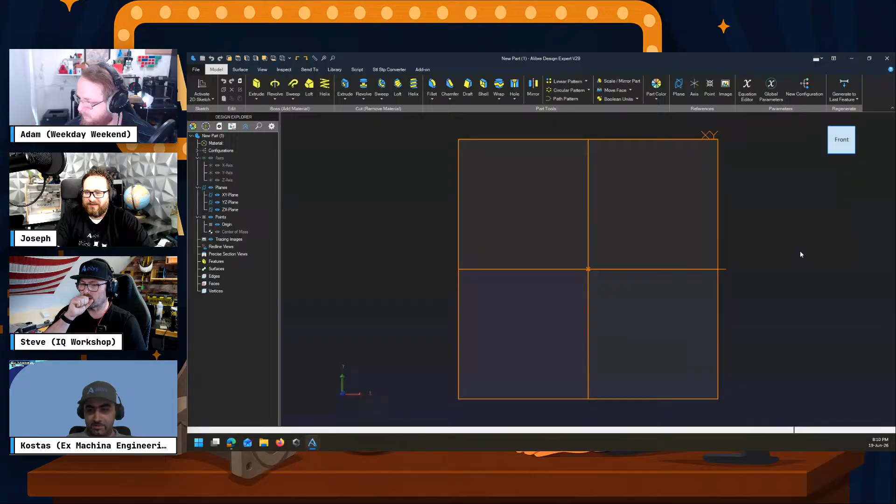So what I will be showing you guys now is the official Excel add-in. So let's say that we've got a flange here. This is the original example, and let's say the outer diameter is 285, and the inner diameter, let's call that 160. These are not real numbers, they're off the top of my head, but you can definitely look up real data and design off of that. So this is the flange disc.

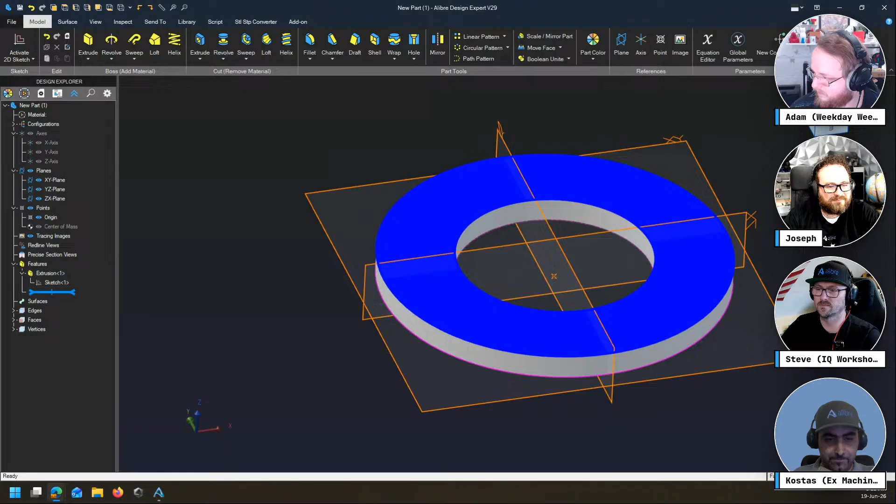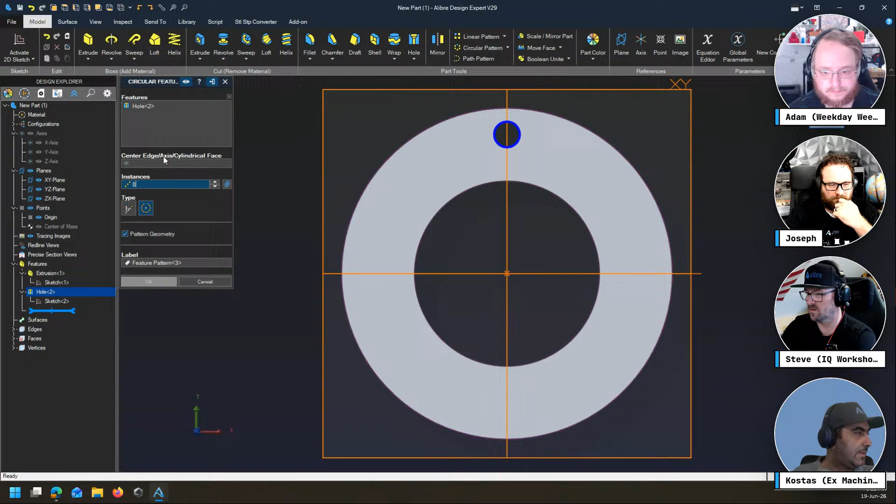Okay, let's get a hole going in there. Hole wizard. I think I have too many presets. I know how that goes. Yeah, the first time you open it, it takes a while if you've got a few presets. Okay, let's get a radius going here. Let's do 120. Is that going to work? Yeah, that's fine. And I'll pattern this 8 times. So this is a very basic rudimentary flange.

If we go into our equation editor, you will see that as we're designing, we're creating parameters. One parameter is a count parameter, number 8, that's the pattern I just did. Then you've got outer diameter, inner diameter, and you can change these names. This is the hole diameter, PCR, the circle radius. So this is the flange thickness, the hole diameter, and the radius of the bolt circle.

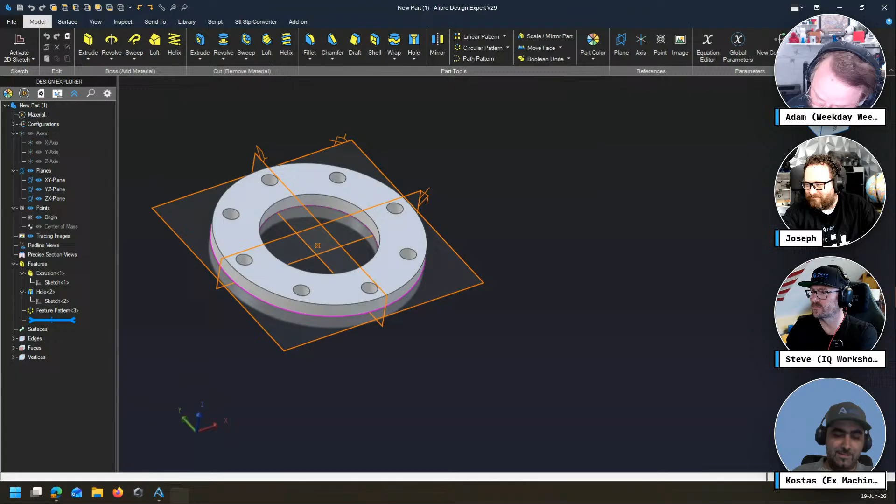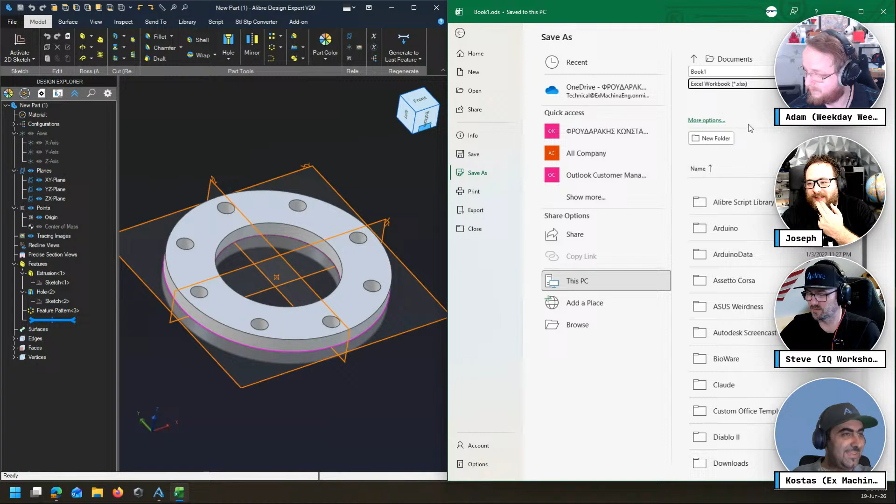I need to save this somewhere, I'll just do my desktop for now. So what happens now if we fire up Excel? Sorry, technical difficulties, we'll get there. If you go into add-ins, you need to save this workbook. Let's save it to documents. For some reason, my Office saves everything into open format first. I guess it knows who the owner is.

As soon as you open up the Alibre Excel add-in, and I show in my video how to install it, it's really easy, you get this screen. You have session here, configuration. It can also drive configurations, which is amazing. If you click here, you get this dialog box, which shows all of the open Alibre files. You might have part files or an assembly open. It'll all show up in here.

If you only have an assembly open, what you will see here is the assembly and also every other part file listed as open. Right now we only have this, so I select that, and you see that it brings the parameters in.

Let's now do a quick table. Sorry, I should have prepared this in advance. This is the OD. This is the ID. What else do I do? This is the disk thickness. This is... what else do I need? This is the hole diameter. But this is a good exercise to see that this is really easy and really quick to work with. So this is the hole diameter, and then we need the hole count.

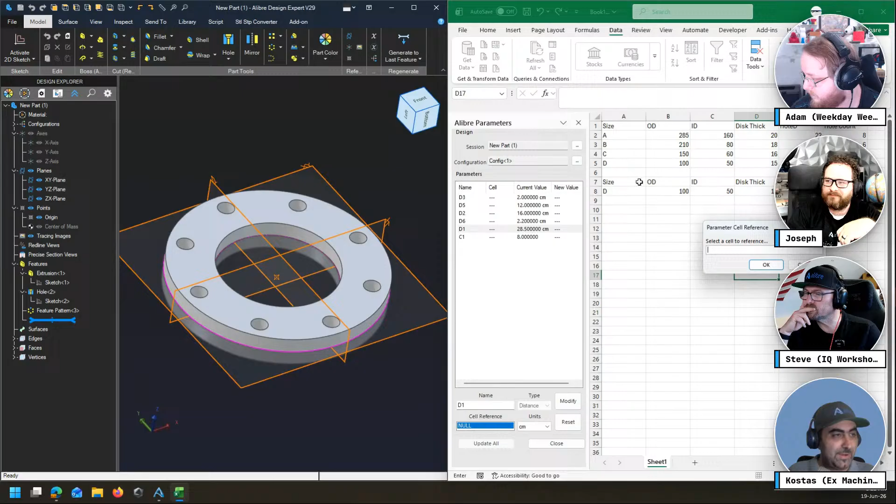So D1, okay. I click here on D1, and you see that I get some things down here. First of all, it says cell reference null. We don't want it. No, we want it to reference a cell. So as soon as I click on there, I get this dialog, and it says select the cell to reference. This is pretty straightforward, right? So I select this one, the OD, right? And I hit OK, and then I need to tell it what's the units.

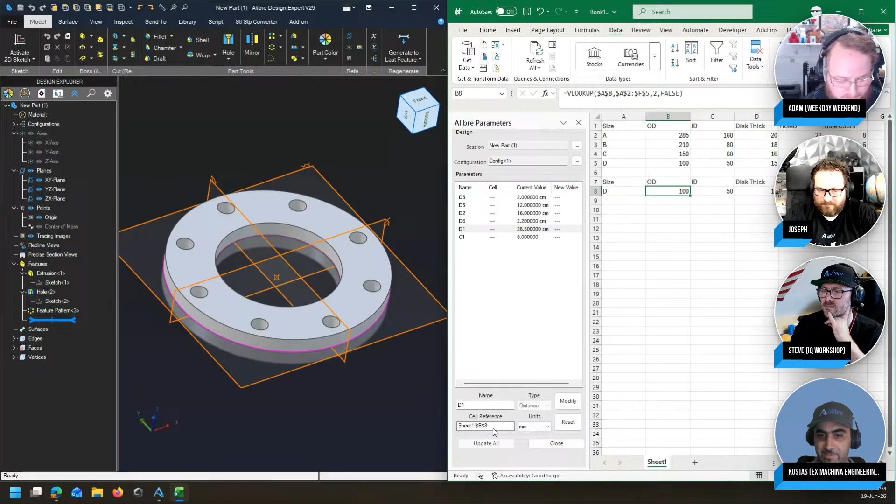It's in centimeters, not millimeters. It's not letting me highlight comments, but yeah. So you have your units down here, right? And you tell it that this cell reference that I just gave you is in millimeters. It just needs to know that, even though it operates in centimeters as it brings it in.

And after I select these two things, I just click modify. So what just happened? First of all, this became millimeters. That's easy to see. And now there's a cell reference, and the current value is 100 millimeters.

Just bringing it in to open things up. We have a column here that says new value, that is all blank at the moment. So let's go through real quick and do all of these. It's not going to take a huge amount of time, so this is the disk thickness, and again, it is in millimeters. As you modify things, you still have an overview right from this table, just to make sure that you're doing everything correctly. So see, now we missed.

Okay, so I'm just going to insert a column, doing it live here. Doing it live, right? Bolt circ, radius, right? But that's the beauty of it. It is this easy to work with, which is amazing, isn't it?

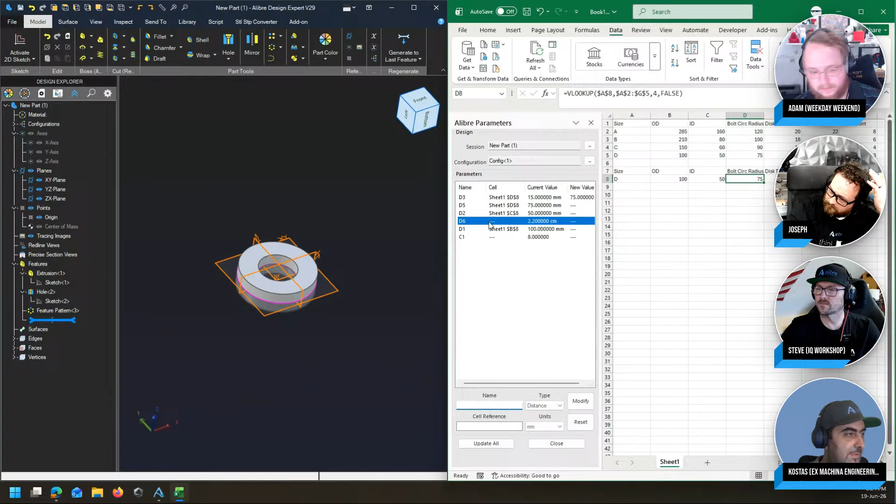Okay, oh, I didn't. Okay, so you see now, guys, I didn't hit modify there, so it didn't go in. Now it will go in. D6, okay, that is the whole diameter, which is this one. Do I have E8? Have I put that in?

Okay, I need to change this. So this is the disk thickness. Okay, millimeters modified, okay. So I scooched everything one column over, and then I almost put myself in a corner there.

And finally, we have the hole count, right? So this is how this works. By the way, the hole count is an integer, right? Doesn't have any units, and it recognizes this, right? Okay.

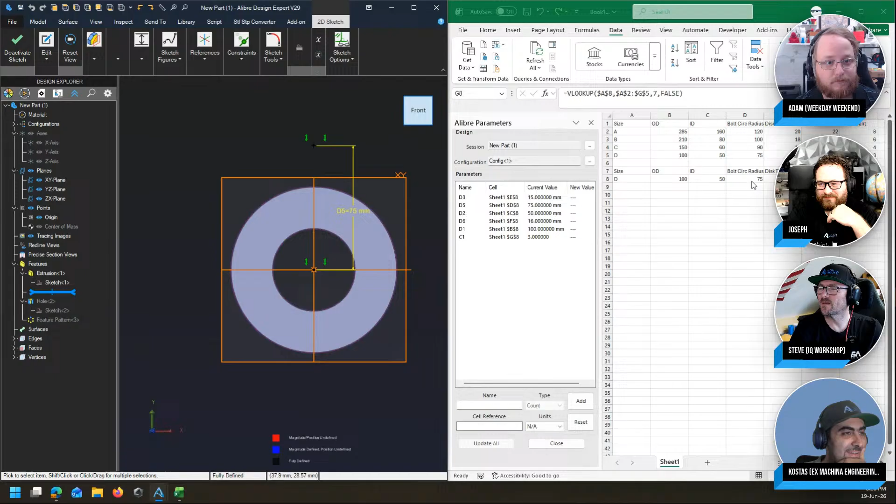So this has updated, which means that I messed up with my hole somewhere, right? Okay, so this 75 doesn't work. You see, guys, we need to rethink that. That's the radius, isn't it? So maybe 75 divided by 2.

So yeah, I guess this works a bit better. And you see that now that I changed this, right? I changed it in the table. The VLOOKUP picked it up, changed it in the driven cells, and the add-in picked it up, and it's telling me you have a new value there. So I just say update all, and it's in here.

I'm inside a sketch, right? It's not, it works like seamlessly. And if I deactivate my sketch and hit F5, it should go through. And let's check, what is this, this diameter is 16 millimeters, right?

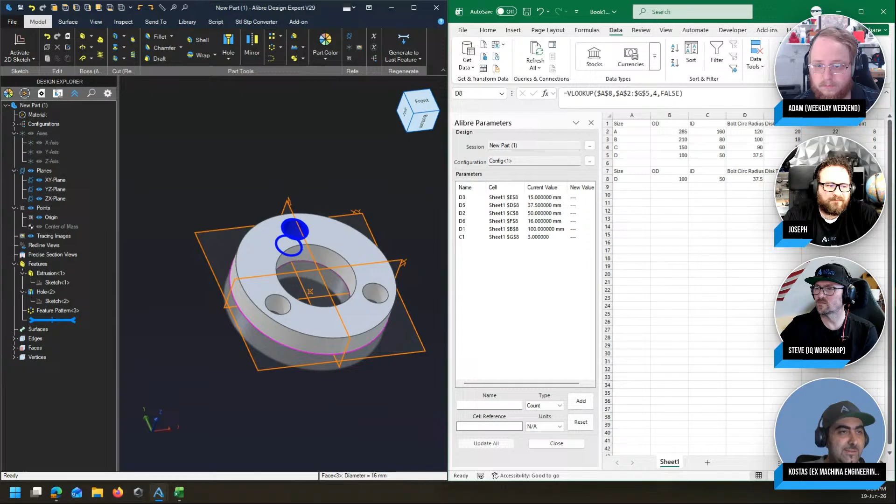So let's change this, I don't like it. Change it in the table. The VLOOKUP picks it up. I hit update all, and now it's 12 millimeters. So let's go and build our original one again. Update all.

Well, this will take a while. This is what we started with. Let's see, size B. Okay, I think these all need to be divided by 2 or something. Let's do this 80, let's do this 55. Okay, so size B.

You see, I'm changing these as I go, right? Hit update all. This is our size B now. So hole diameter, if I click here, I get, you see down here, 18, size B, hole diameter 18, right?

So what do I have now? I have a part here that will change according to my data. And the beauty is not when you make the data by yourself like I did here, right? The beauty is when you go online and you download a huge table and you clean it up with a Power Query or something. And then what you have is all of the parts in that single table as a single part.

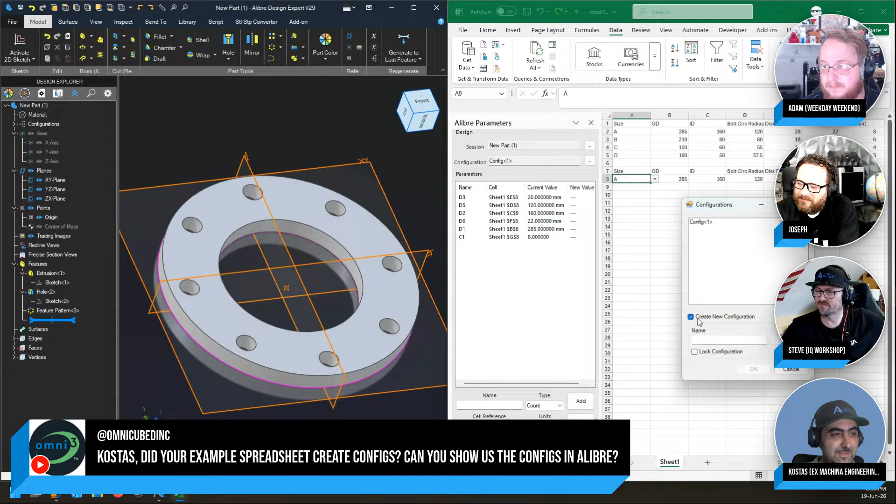We got a pretty good question here. Did your example spreadsheet create configs? It didn't, and why is that? Because I didn't ask it to. You see that I can create a new configuration right off the bat here, guys, there you go. There's proof it does not create new configurations automatically. That's the beauty of it, and the beauty of this spreadsheet.

But I might be hogging the time, and this might be a nice subject for a video, a deep dive.

The beauty is that when you create a new configuration from the Alibre Excel add-in, Configuration 2 can drive the same parameters from different cells. So right now, D1 is driven by the cell in sheet 1 at position B8. I just clicked on it and it shows me what's what.

If I do a configuration, I can have the same parameter driven by a different cell down here. So the combinations are amazing. Seriously, your imagination is the actual limit at this point, to what you can do.

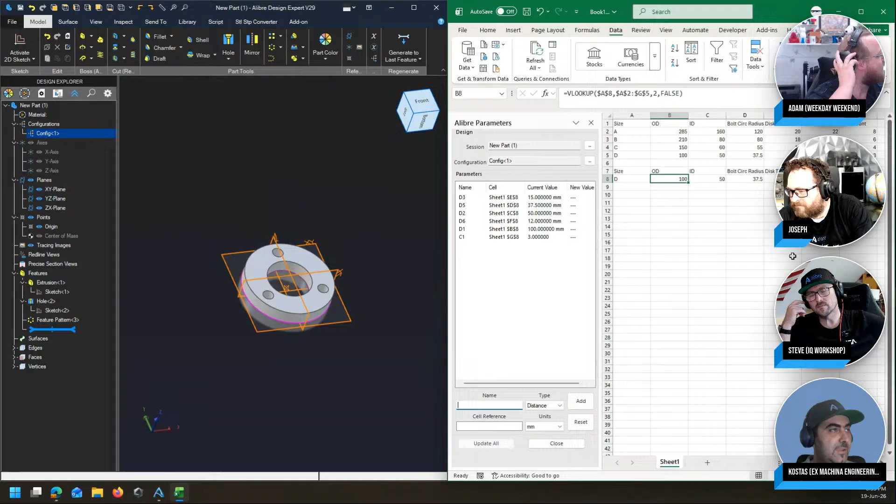To put it in database terms, if that helps anyone, this is not a one-to-one relationship. This is a hybrid relationship, because it can be a one-to-many and it can also be many-to-one. This part can be driven by many Excel spreadsheets if you want, and also many parts can be driven by this one Excel spreadsheet.

In my video, I take a single Excel spreadsheet and drive a shaft, a pulley, and a key - basically the entire assembly from a single Excel file. And just to blow your minds even more, this works in Atom 3D, but it can also drive global parameter files, not just 3D models of parts and assemblies. You can actually drive the global parameters, which has its own layer of configurations. The level of complexity management you can do with this little tool, given to us by Alibre for free, included even in Atom 3D.

There's a lot of questions here. This is kind of just a really broad view of it. Kostas has a couple different videos that explain this whole thing way more in depth, as well as there's always the forum if there's something specific that you're wanting to do.

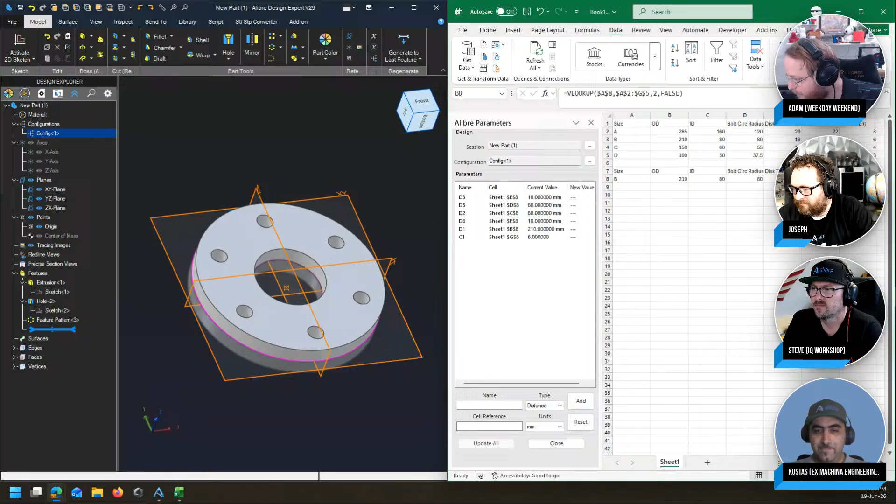This is a good one here: imagine the part needs a complex drawing that I don't want to make 10 times over. Exactly. How does a save-as workflow work that includes the drawing and allows multiple parts referencing the same table?

That's a great question. Oh yeah, sorry. Let me tell you, it's as simple as this, right? So...

Let's say that in one assembly I need size A. So this is my generator part, right? Let's consider this to be a generator part, and then I go and hit save as. I'll call this size A, and now I have size A as a separate part file. I can go in and bring it into my assembly.

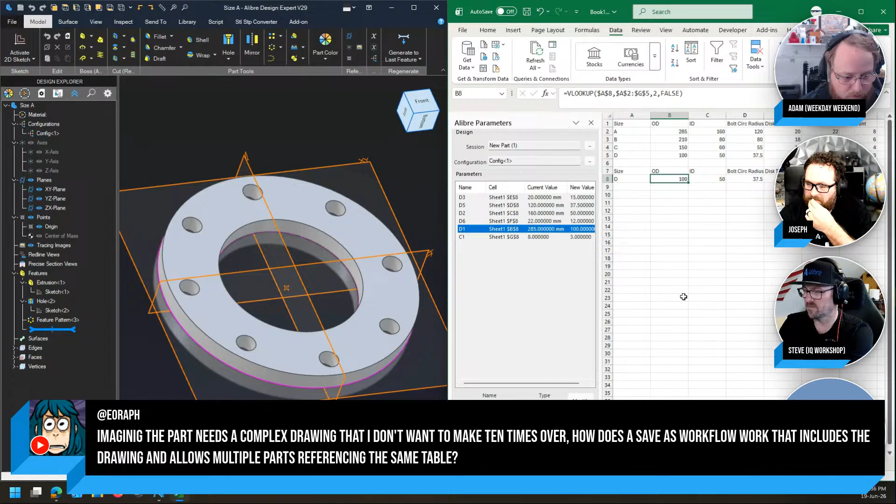Now, three days later, I make a different pipeline that requires size D. I open up my generator part, make my size D, and then go and save as this file. You can see this is size A already created, and I will just save this as size D. So basically, what I've done here...

And the way I propose to you guys that you use this is you can make a library of generator parts, right?

So there is a caveat to that, though. Let me just show you what it is, right?

Let's close this. Let's go to size A.

And while we're waiting, I see a pretty compelling question: is this a way to create points for a spline curve?

And of course, yep, there are a few things behind that too, so don't let me forget to talk about that as well.

So if I go into my equation editor, right, you will just get this message saying missing external reference: one or more externally driven parameters have a missing source spreadsheet file.

Are you sharing that, Kostas? Because we've got the Alibre launcher. Oh, I didn't, I'm sorry, let me do that again. That's okay, it opened up in my second screen.

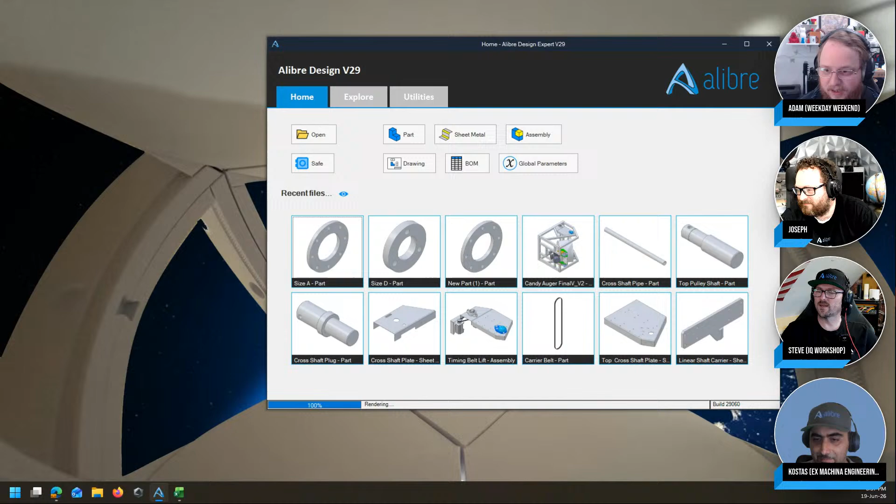And I also see this question: can this be extended to the sheet metal?

Guys, if it opens up in Alibre, it can be driven by an Excel spreadsheet. So sheet metal, whatever, sky's the limit, basically, right?

Okay, so let me bring that in. So I click on my equation editor here, and I get this error message: one or more externally driven parameters have a missing source spreadsheet file. So basically what it's telling me, and you see the source here, right? It says X. Okay.

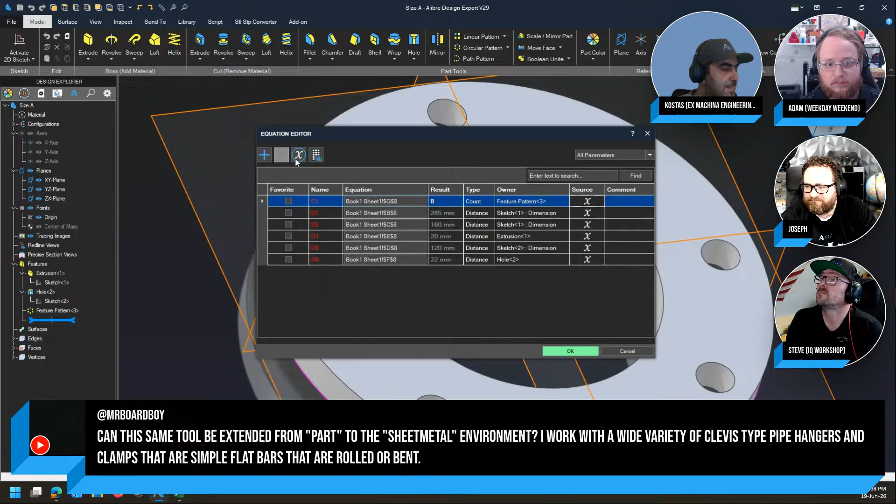So if I change this, can I change this? So yeah, I cannot change that.

So the idea here is that this part now exists as is. You can add things to it, right? For example...

What can I do? Let's... okay, having... oh man, this is really slow. Having a keyway cutaway that doesn't make real sense for a pipe flange, but you know, let's just pretend that it does.

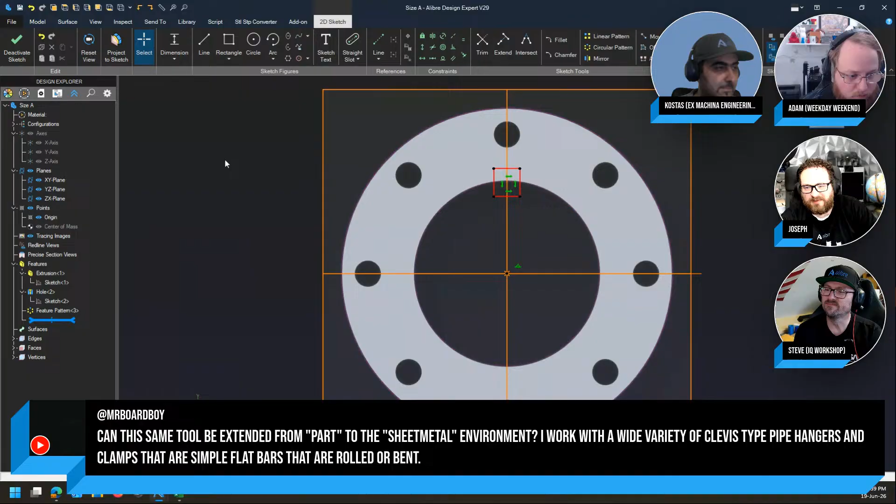And I just used my new macro here for cut through all, right? Just to plug in my latest video as well.

So now you can add things to it, right? I'm getting that message again. You can add things to it, but you see that the other values are basically kind of locked.

So you will consider these files, you know, like starting files, right? You get your file, it works, it calculates, it's usable in an assembly, but in order to break the connection between the spreadsheet and this file, you basically need to make new parameters and go in one by one in every place that they are used and reassign them.

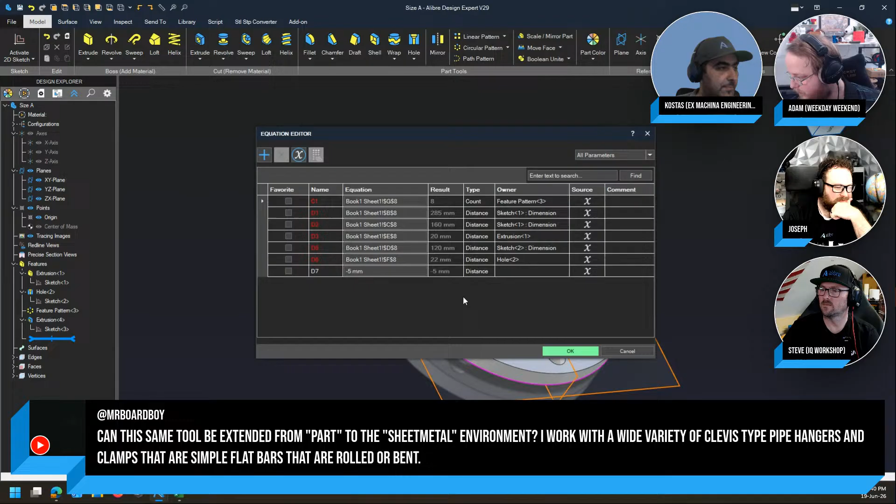So yeah, the way you treat these parts is as generated dumb parts, because they're now locked like this, but you can then add things to it, right? So yeah, that's the general outlook of it.

Any other questions? We still have the highlighted tool comment here that yeah, it can definitely be extended to the sheet metal. Yep. And you might want to check your noise filtering, but I think we have some background here.

I also see a question: do you always have to use the generator part workflow and save new files, or can the spreadsheet create configurations in the same file? Thanks for that, Joseph.

Yep, so for a second it looked like you could tell it to generate configurations. So I'll let you take that one, Kostas. Can you generate configurations from the Excel add-in is the question.

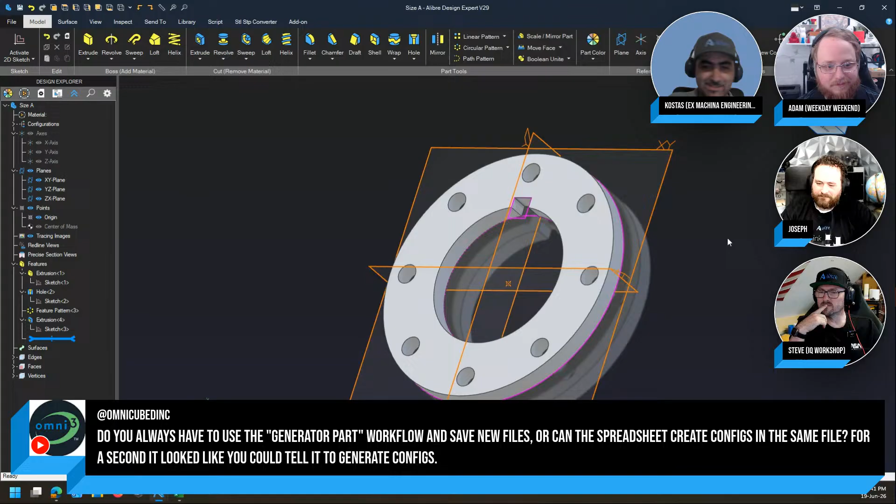You can. And I'll be completely honest, I've never done it, but if you would like to see me fail live, we're gonna pull the lever. Oh yeah. I mean, I always say that when you're making a YouTube video to educate people, you need to be brave enough to fail on screen. I don't always do that. I'm not always that brave, but yeah, let's fail on screen right now.

So this is our generator part. Just to answer the first part of this question, no, you do not always need to use the generator part workflow, because you might design a part that you want to go in an assembly, and it needs to exist only in that one assembly, right? You don't need to make copies of it. It just needs to exist in that one assembly. Or you can drive the entire assembly off of it, right? So in that case, you don't use the generator part. Your part is your actual part.

But in a case like this, when you're making a flange, which, let's be honest, in a single pipeline you might use dozens of these, or even hundreds, right? Well, in parts like this, it pays to use the generator part workflow. But if you're just making an assembly and you want this part, and the timing pulley, so my other video is a great example. A shaft, a key on that shaft with its key slot and whatnot, and the pulley are all driven by the same Excel file. So in that case, it's not a generator part workflow.

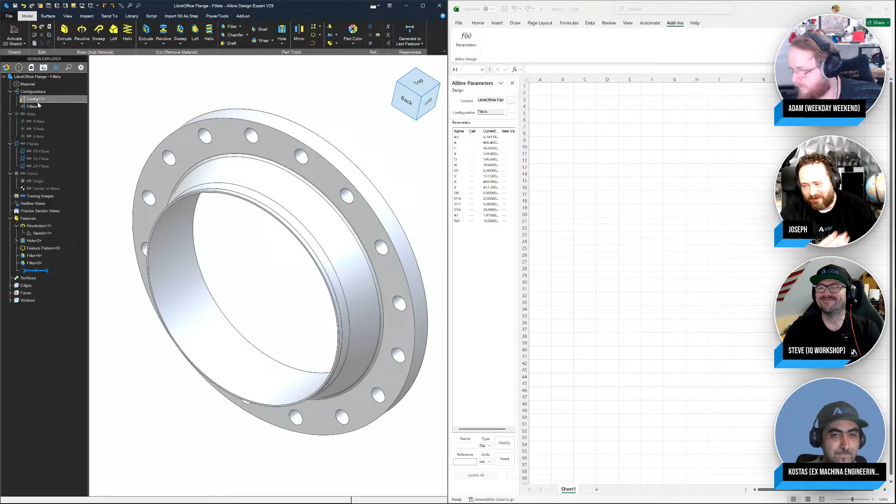Go ahead, Joseph. Sorry, if you don't mind me cutting in here, I can switch here. So obviously I have this flange with two fillets. I'm trying to be cool like Kostas, because he put out this awesome video about weld neck flanges, and you can choose configurations, but if you click these three dots, you can just click a box here that says create new configuration, and I can say new config. We can lock it if we want to. Click create, and then I got this new config there.

So useful, handy. And as Kostas was saying, I think Kostas is the real master at Excel here, because everything is so well thought out. So, but yeah, kind of a cool nugget there. Yeah. So that's what I was about to do here. Oh, sorry, did I steal it? Sorry about that. No. Don't worry about it.

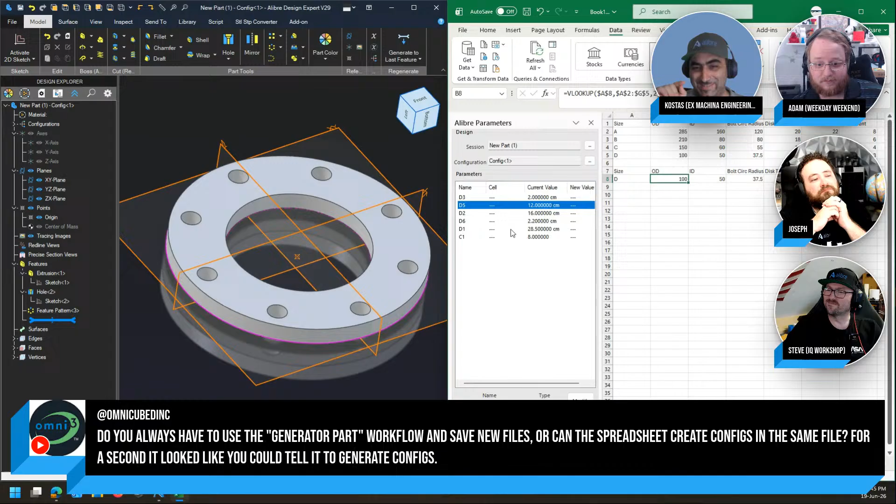So let's call this config "about to fail," because why not? And let's hit create, and I'll hit OK. So where are we now? Okay. I didn't save this file. Okay, so this is okay. And I've done this mistake with the Excel add-in before. It's not the first time I do it. After you link your Excel file, you need to save both the Excel file and your part file, or else you didn't link anything. Okay? So that was a nice one. So this is all unlinked again.

Yeah. If you want to bear with me while I do that again, or maybe... So I got a point to make here. I think go, Steve. Go. Is it fair to say that not all use cases are equal? So you've got somebody who is creating, if you want, seed parts: flanges, pulleys, gears. But then you've got somebody in a different use case that would be creating assemblies and driving parts. So what you're demonstrating here is a framework that has the flexibility to do all of these different things, not just one. So it's about the viewers here with us today looking at their own use cases and seeing how they can apply this framework to it.

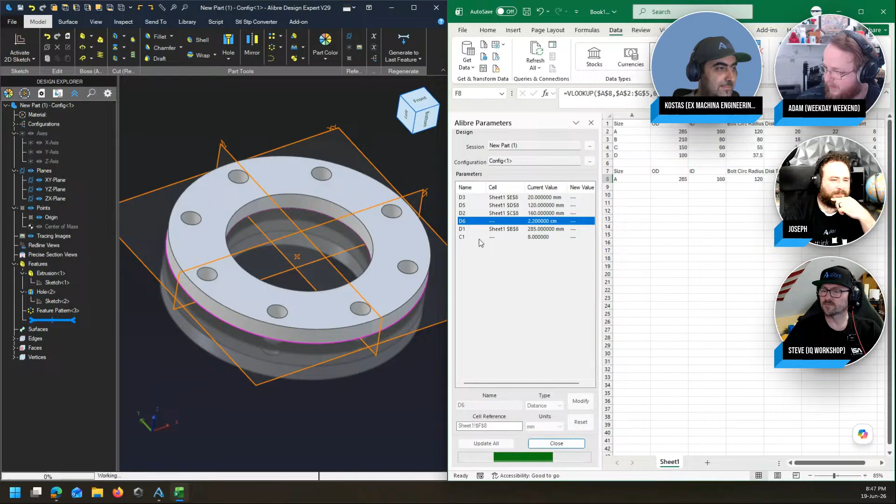Definitely, that's a great point. Keep in mind that although Kostas is using Excel, Joseph is going to show us a little bit about using LibreOffice here in a second, which is completely and totally free. On top of that, awesome. The fact that you can do it, right?

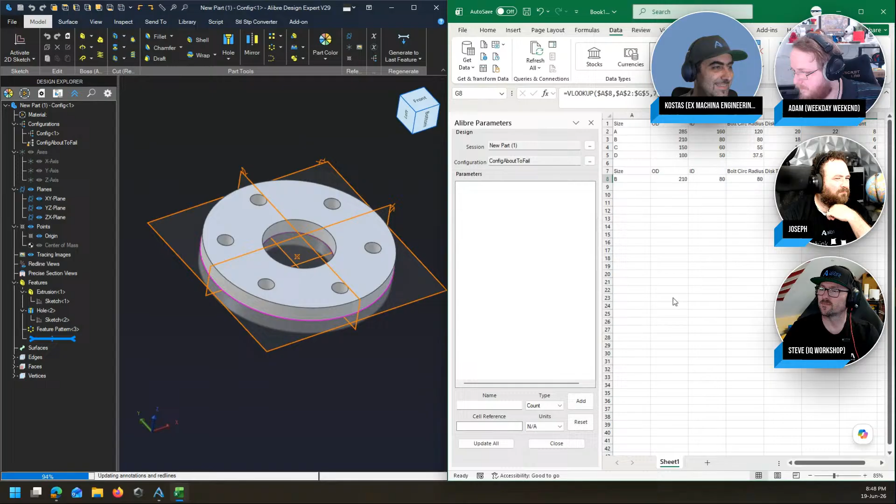Okay, so now I changed my configuration, right? So you see this, I changed my configuration, and now I can be doing different values, right? Let's just say that I need a different line, but let's say that this config is always this second line. That didn't work. Instead of 8, let's do 6. Okay, let's modify that. Right, and update all.

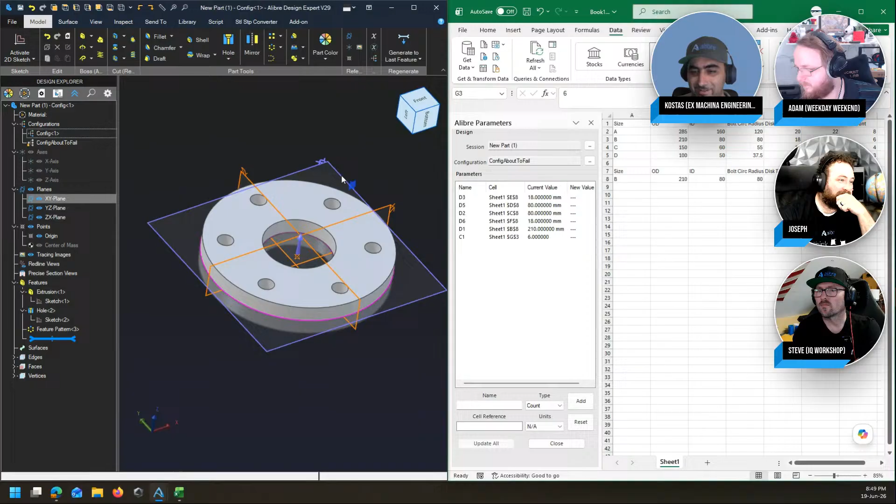Okay, so this now is one part, and my other config. Okay, so these are locked together. It's a bit hard to explain how configurations work on the fly here. There is a lot to discuss on configurations. Maybe that's a great video to do in the future. But yeah, you can also create configurations right from the Excel spreadsheet, and they will propagate into the actual part, and you can manipulate them and do what you want with them. So yeah.

Well, maybe it's time for... Go ahead. Any other questions? Just to close the circle on OmniCube's question. Yeah, you can tell it to generate configs. No, you don't always need the generator part workflow. That's it.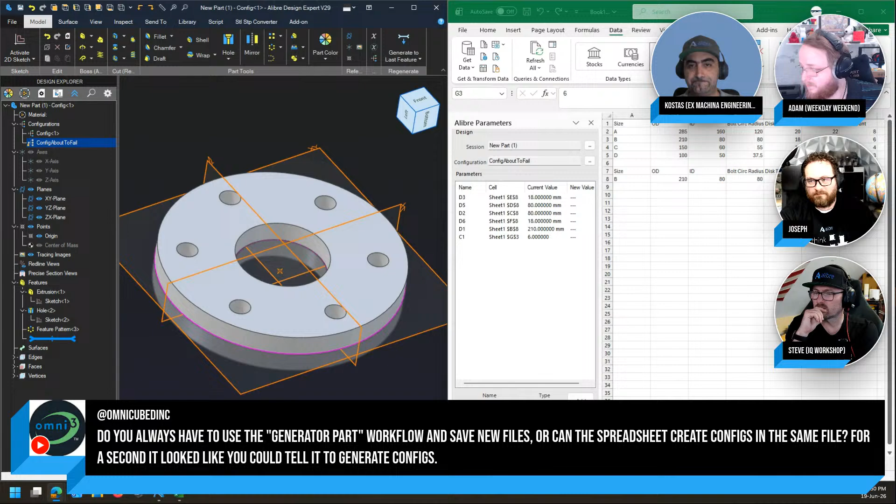Fantastic. Well, thank you for taking us through that, Kostas. Sorry, Joseph. Oh man, let me show this. Right?

Can you use text in Excel to drive a text element in Alibre? The answer to that is no, unless you are a complete madman like me. So I do mention this briefly in my latest video on the Excel add-in. I have another video on how to do a dynamic serial number, right? Where I create a sort of... is it a cryptex, where you need to change the numbers in the Da Vinci Code, right? That device. So you roll some... oh man, I don't know how to explain it. Go check my video, right?

Dynamic serial numbers. Now, if on those polygonal wheels that you boolean into a part and stamp in your part, on each side you put a letter instead of a number, and then you use Alibre to match each letter in a word to a number, which you can do with the RIGHT and LEFT functions in Excel, right? What you can do is have a word written in Excel, below it the numbers, the location of each letter in that polygonal wheel, and then you drive that into your parts,

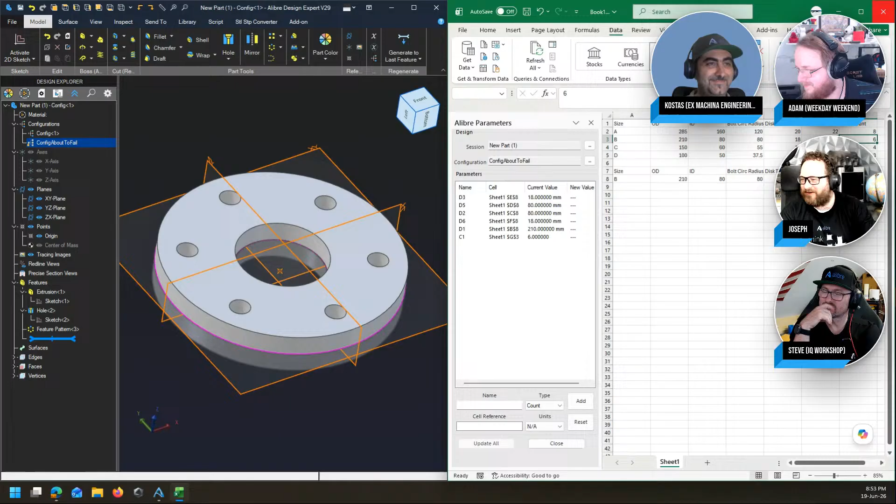Now, we did get this interesting question about, can you use it to drive splines? And yes, you certainly can. That's a good one. Because what the add-on does is it takes information from Excel and puts it right into equations. You can use those equations to drive splines. The important thing is you can update the spline curve as you change your data in Excel.

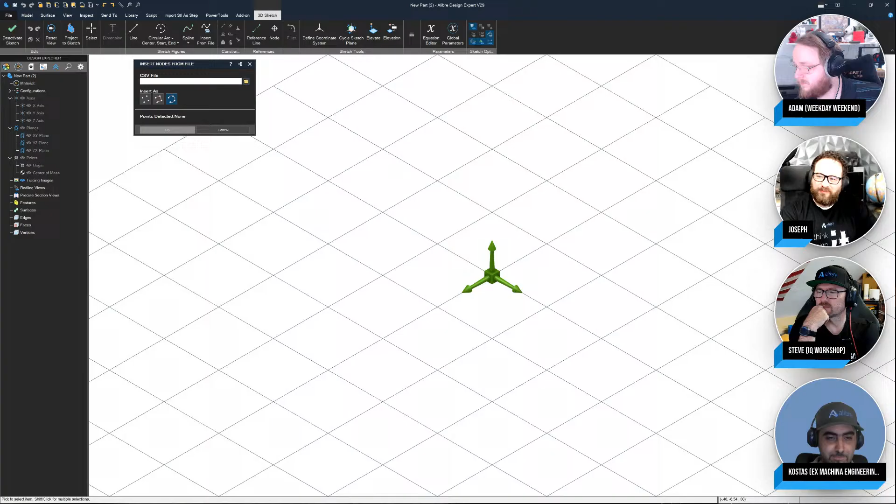But if you're looking to just do a spline curve, I think something more preferable is to insert spline from a CSV file, right? So I can click my little folder and pull up a coordinate file, spline coordinates.csv. This is a very loose example, but we can just import these and it builds a spline in 3D or in 2D. We have this in both 2D and 3D, where you can just put a bunch of points down, connect them with a spline, call it good. A lot easier than creating the points and dimensions and trying to work it out with all of your equations.

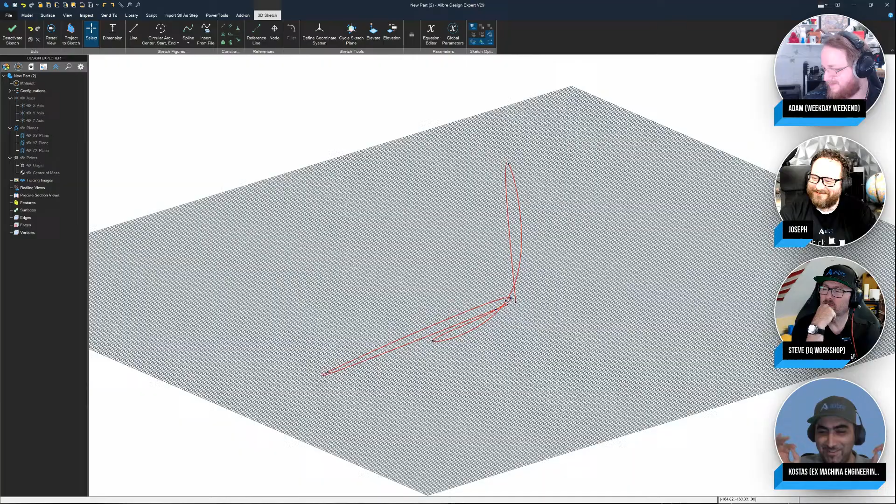So if you need updates, use the Excel add-on. If you don't need updates, I think this CSV is a really handy tool. So could you then create weldments using the Excel add-on in the same way you'd be doing spline? That is, I mean, weldments is not out, but I don't see any reason why you couldn't have some Excel-driven weldments soon. Soon. But Adam, can you pick up on the magic of this thing, right?

Oh yeah. Imagine now that you use weldments to make a 3D printer frame, right? And then you tie that to Excel, and then you have 50 different 3D printers, and you change them by clicking on the drop-down menu. CNC. And CNC machines and entire machines, and this is amazing, isn't it, guys? This goes deep, doesn't it? Yeah. That is going to be crazy.

And the funny thing is, I'm nerding out over this, and I personally don't even see a use case for it for me personally. Like, I don't. It's one of those things where, like, this is freaking amazing. How are you going to use it? I don't know, but it's amazing. I don't know. Who cares?

It's amazing. I've got a use case for it. If you want to design, for example, your own gears that are particularly difficult to manufacture, like a herringbone gear, you could pattern that out in Excel, so Excel drives it. And if you need a gear of a different diameter, a different tooth count, etc., you just punch in the details. You haven't got to go through the hassle of trying to remodel that over and over because you've got

it as Excel-driven. The funny thing is, when you look into some of the inner workings of Alibre, some of Alibre already uses the Excel add-on, like for a lot of the threads and stuff. It's all spreadsheets, which is amazing. That's how powerful it is. And some of the built-in stuff in Alibre is already in spreadsheet files, which is genius and it's fantastic. Look, the threads are in an Excel file, in a spreadsheet file.

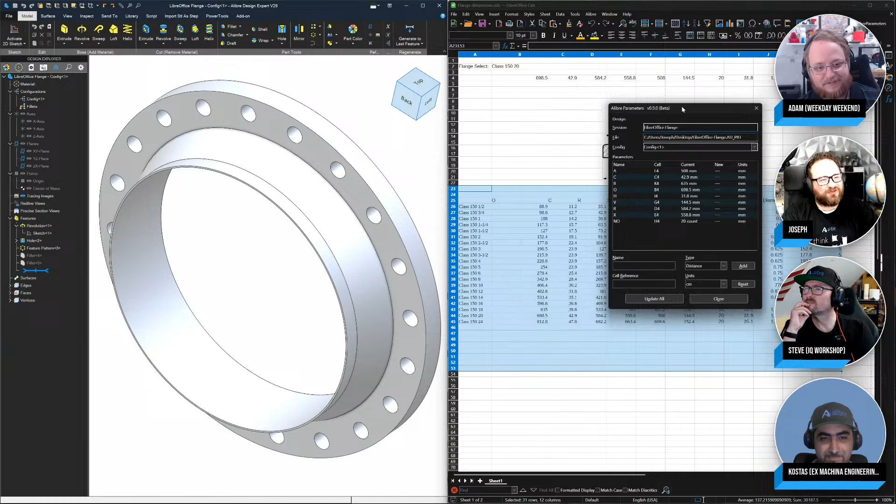But so here we have a brand new LibreOffice document. I'm trying to be cool like Kostas and, of course, make a flange, just like he did in that epic Excel video. Amazing. So I have this thing in my ribbon that says show Alibre parameters, right? I bring it up, and it grabs all of the parameters from our open document. And just like in that video, we were able to do a VLOOKUP here and then update our active document

to work. Now, my favorite thing of this whole thing, I hate clicking through boxes, and this box, after we update and it tells us, it just dismisses by itself. It is heaven to my eyes that things get rid of themselves, but maybe that's a small point. So we are able to associate these things. Furthermore, we have the ability to switch the active configuration of our part from LibreOffice. And so here I have a fillet configuration.

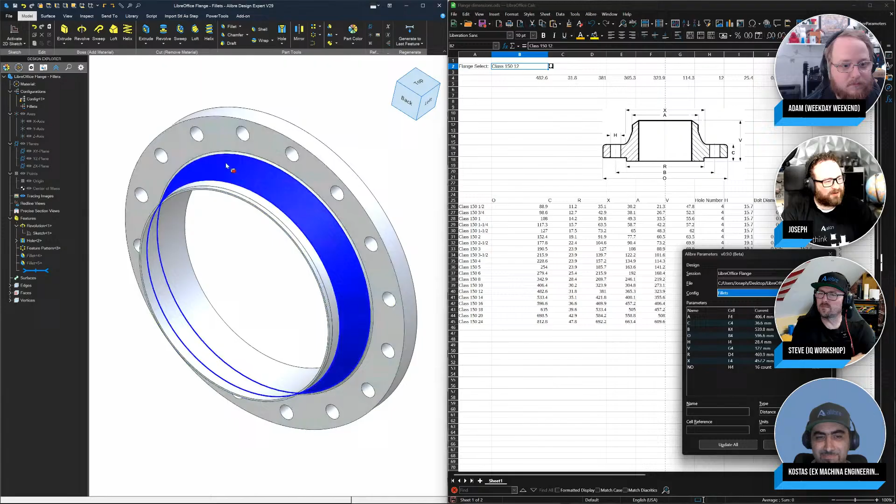I can switch back, and the part auto updates pretty much instantly. Man, that's so cool. Isn't it great? It is great. It's so cool.

I can open up another part here. Oh, weekday, weekend part. Shout out to Adam. But we'll pull up this wheel. This just takes a quick second to rebuild. While it does, I'm going to start a new spreadsheet here from LibreOffice. And we'll tile that over here.

So when I go to show Alibre parameters, I now have two files open. They both have named parameters. And so the question is, which one do we pull from?

Once again, I'm having the same thing as Kostas. It takes a little longer when you're live streaming. So thank you for bearing with me. This is usually a pretty quick update here.

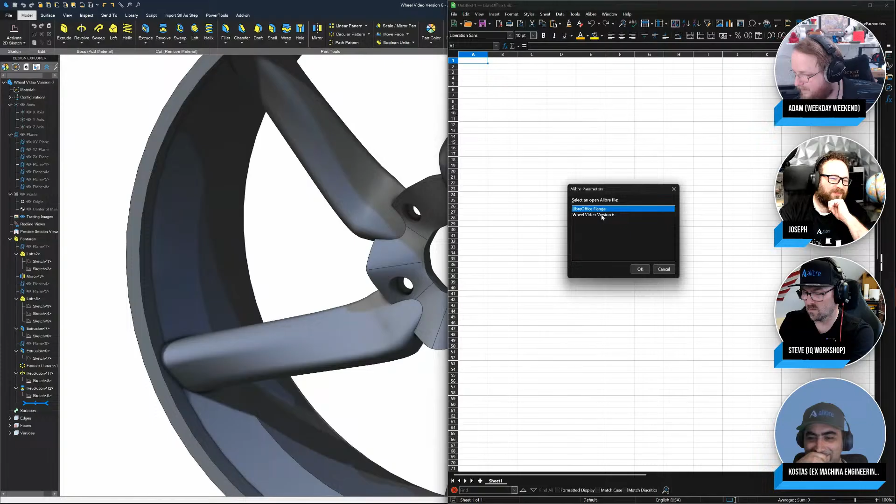When I go to show Alibre parameters, let's see what happens. Yes, it scans both of my open documents, and I can choose which one that I would like to show the parameters of. So even though this is rebuilding, we can still import some of these parameters.

So I can say maybe, add a parameter here, and currently we have a count of 5, so I'll make a count of 6, and getting some new parameters going. Maybe we'll say width and make that 24, right? So when we want to associate that with a cell in this, we just say number to pattern. We want to make a cell reference there of, it looks like C11.

Well, it's still loading over here, so we're not going to see any fireworks, but it looks like we're almost done. So it's pretty simple, right? We can just type in the cell references that we want. We have the different configurations that we want, and it's all going to be there. So one parameter was added, and it's already updated in our wheel.

Once again, I can adjust the width. Our cell for that, of course, is D11. Yes? Can you nudge that parameter box over? It's sitting behind you right now. I'm sure everybody would rather be looking at my pretty face, Steve, but if you insist. Yeah. So once again, we can just, and I did something. So with the wheel.

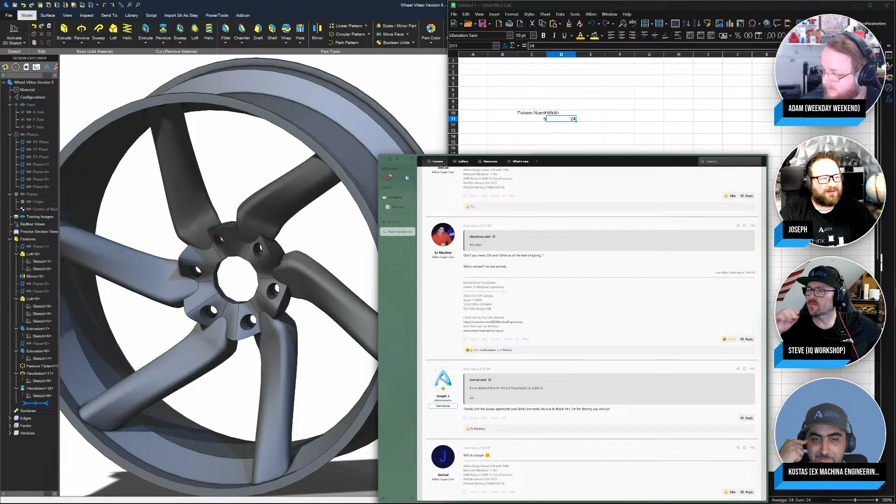For our viewers at home, is this something that's available now or available soon? Maybe the units, Joseph, they're in centimeters. I think you're right. It does automatically do the units on the fly, but yes, that is a big question here. So when is this going to be available?

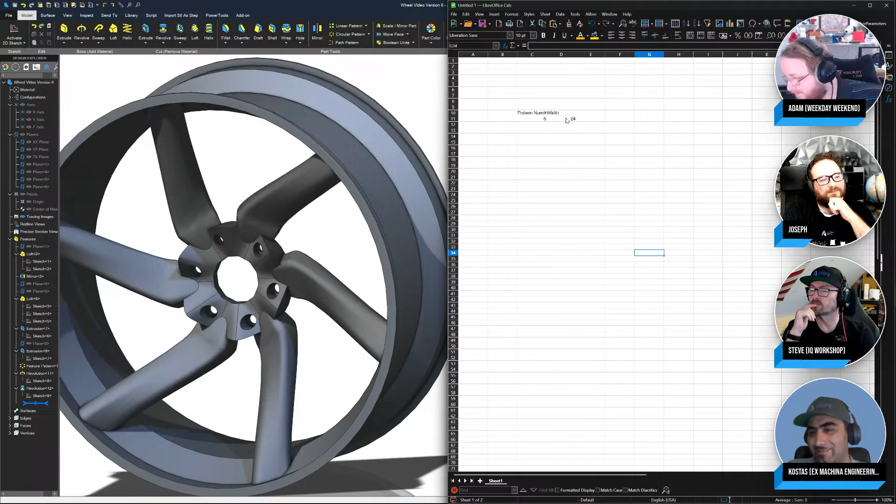And this is just taking all of that horsepower that we just showed and bringing it to LibreOffice Calc, which is free. I mean, that's so absolutely cool. So cool, man. That should be a pretty good overview as to what we're looking at. You cannot create configurations in this, but I think that's coming soon. This is a beta. It's not fully released yet. And so take that into account.

We'd love to see how it works for all of you guys. But this should be a really cool and really fun thing to be able to work with. Nice. Yeah. Basically, go and break it so that we can get it all worked out. Exactly. And of course, let's do some beta testing on it.

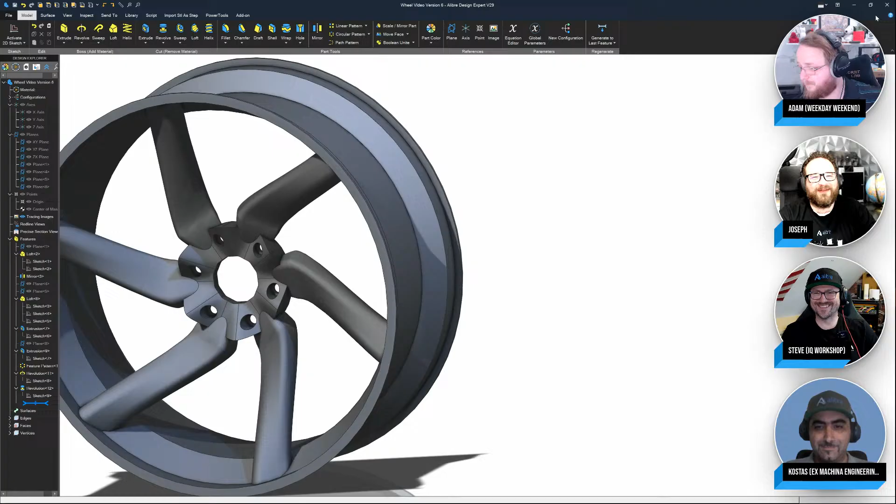That's pretty cool. So I've done this offline flawlessly. I'm running into something here, of course, because it's live and there's probably some screen recording thing throwing something off or something. But so as usual.

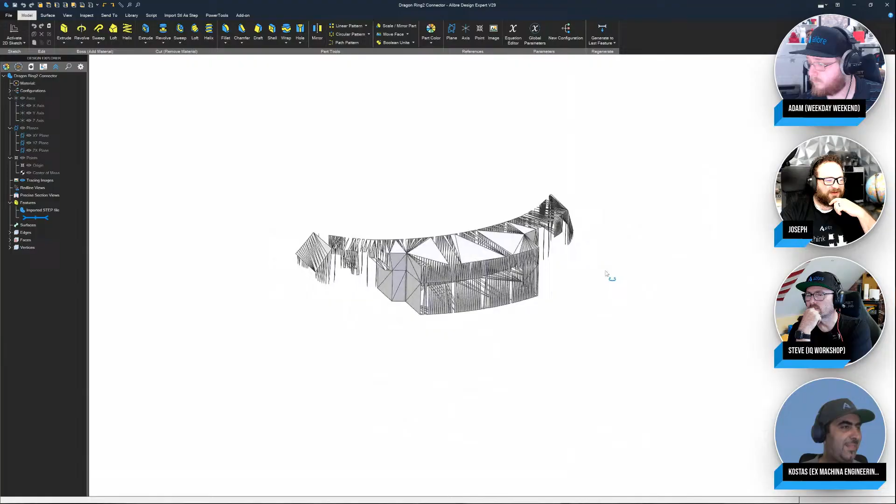Yep, so we get a nice imported file. It looks like it's a bit broken there, but if I tighten the parameters and change some of my import settings, then we can get more of a complete body. But it does work amazingly well.

I think we're live, and so it kind of is broken here. Even though it's broken, I think this really demonstrates well that when you bring an STL file into any CAD program, it is a series of triangles. There's no flat surfaces. I wouldn't like to think what the vertice count is on that.

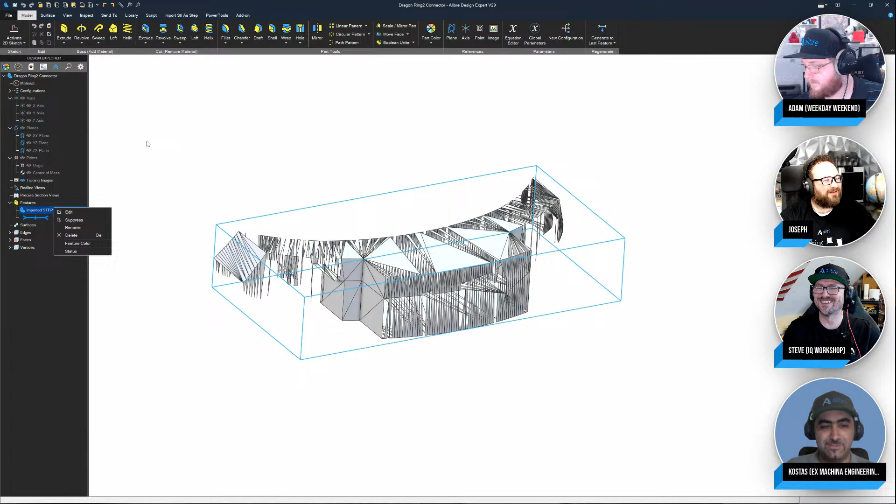That's millions. It's in the millions. It can very easily get into the millions. Exactly. I had - oh yeah, that's cool.

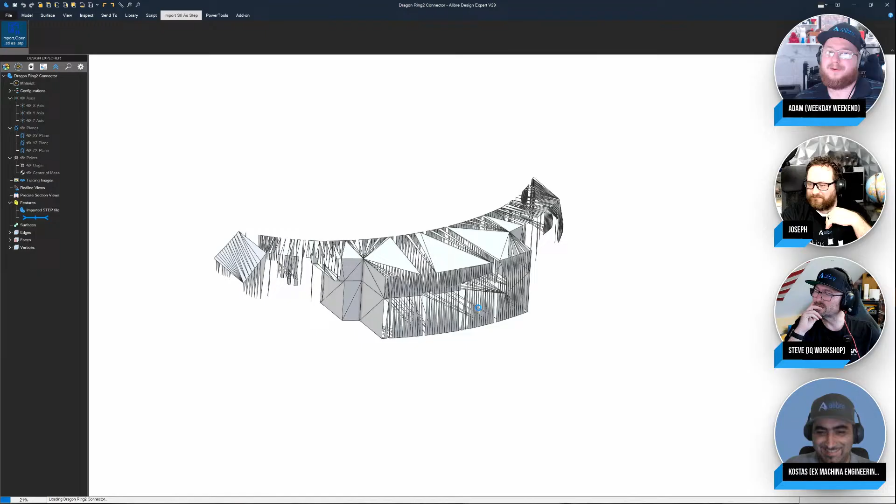A few years back, I had a client who we were designing something. I don't want to give out too much detail. And he said, well, I'll design that mount myself and I'll send it to you in an STL, is that okay? And I'm like, well, I'd prefer if it was another format. And I kid you not, he designed it in Tinkercad, and he sent me an STL, and it came out like a few million triangles and a few hundred million vertices. And it was like a mount that was 30 millimeters tall with a base of 15 by 15 or something.

Yeah, and that's more what we're looking at here, right? So you can get something that you can measure off of or edit. So it's a wonderful program.

Yep, it's a great add-in, and just to remind everybody, we've mentioned this many times in these lives, but let's remind everybody that with STL you lose a lot of information. STLs cannot represent a circle - they break it down into a series of straight lines because they need to reproduce it by triangles. So just bear in mind that if you're at an STL level, you've already lost a lot of information.

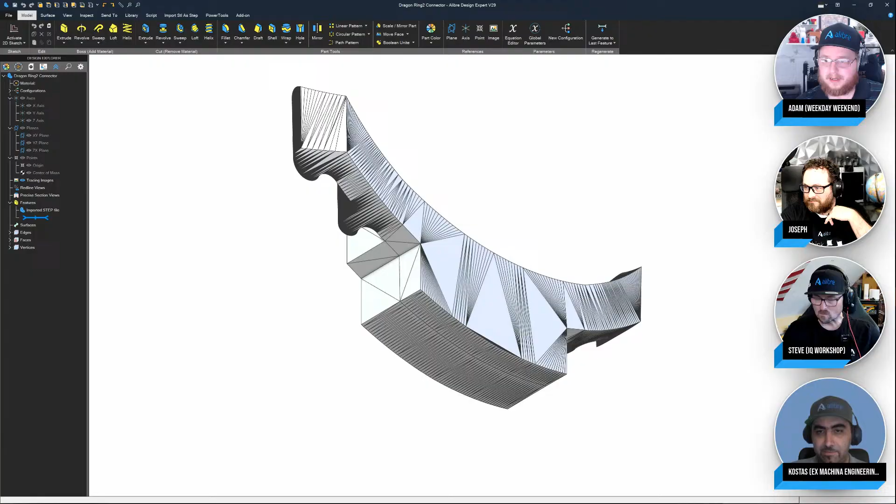And if you bring it into a step file, it will come into Alibre faceted, exactly like the STL file, so it might be unusable. On that, if you're someone that likes to do 3D printing, remember that OrcaSlicer will allow you to import a step file. You can drag a step file directly into OrcaSlicer and print it just like an STL. So if you're using CAD to make your 3D printing objects, just keep it as a step file. Absolutely.

Is there a drivable surface element similar to a spline? Currently, I'm thinking no on that, and I think he means spreadsheet drivable. But you could probably drive splines and create a surface.

How do you create the surface in Alibre? You create a solid, then delete the faces that you don't want, and keep the face that you do want as a surface. In that respect, you can definitely drive the original generation from Alibre. The feature tree is there, so when you update it, it regenerates all the way down to the deletion of the faces and you get the final surface, changed according to what you want.

Imagination is the real limit here, but you need to think ahead quite a bit if you're driving this amount of complexity from Alibre. It is doable within the limitations of Alibre. You create a solid, delete the faces you don't want, and keep the face or faces you do want as a surface element. That can be driven by the Excel add-in as we showed, but that's some complicated work.

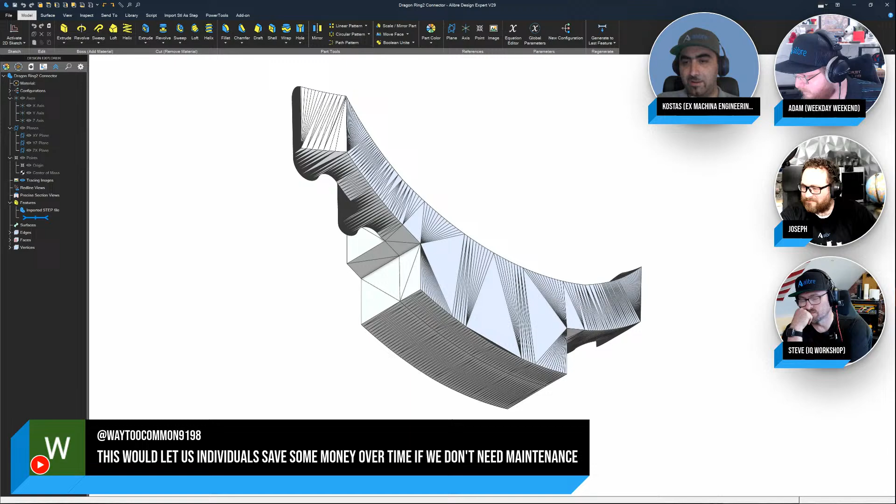Yeah, exactly, that's how it works. You pay about 20% of the original price, and you get 1 year of maintenance during which you can download the new version. It's not 20% for all 3 tiers, but it's there or thereabouts. Keep in mind Alibre is like the only CAD software where you can skip 5 years and then pay your maintenance, and you don't have to pay the missed years in between. It's the only CAD software that's remotely logical in that respect. You don't pay the missed years.

When they make you pay the years you missed, you never really owned it, right? You were just skipping on rent - it's still a rented software. That's a very bad business practice. Alibre doesn't do it anyway.

To this most recent one - can you drive assemblies with Excel adding, subtracting parts or quantities for arrays, etc.? I would say probably, you could do it because you can drive configurations. Of course, you just saw me in this example drive the quantity of a pattern. So yeah, definitely. What you cannot do with the Excel add-in is suppress features or parts.

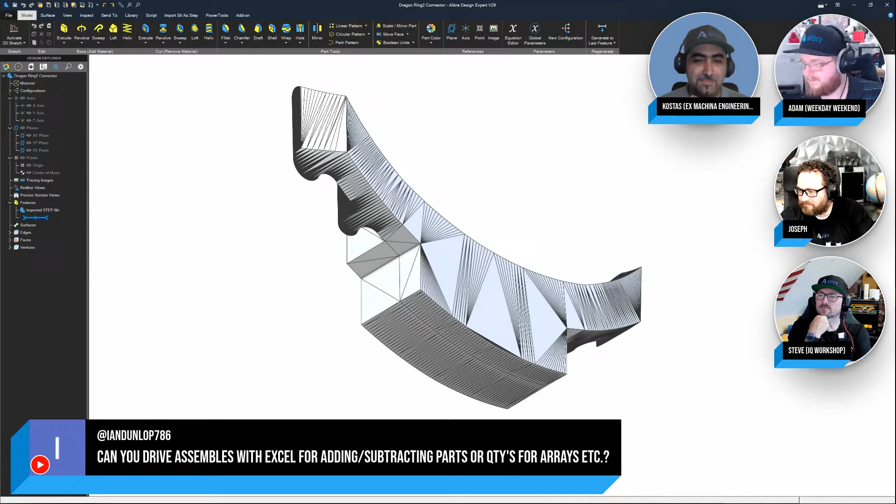For feature suppression through the Excel add-in, I do have workarounds which I'm already using. I'm in the finishing stages of a very large project that I'll make available to the public for a very low and modest fee, and it's all driven through the Excel add-in. In that, I have a methodology developed where I actually suppress features based on parameters in the Excel add-in, but it doesn't do it directly - you cannot switch a value to suppressed, for example.

That's a great question. You think if you can drive it in Alibre with a variable from the equation editor, then you can use the Excel add-in for that - probably a pretty straightforward way of thinking about it. That's a great way to think about it. Joseph just hit the nail on the head - think that with the Excel add-in, you're driving the equation editor, that's what you're doing. If you think about it like that, you have configuration capabilities.

And of course, in global parameters, you just drive the parameters directly.

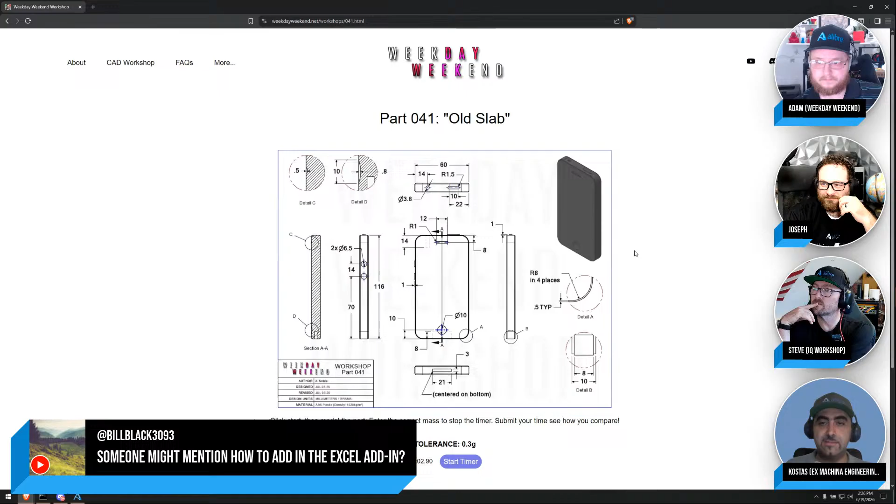I do have a couple of videos on the Excel add-in. I have 2 videos where I use the Excel add-in, and in both of them I show how to install it. It's not like you just double click on an installer and that's it, because the Excel add-in clashes with a couple more Excel add-ins from Microsoft. So you need to have those add-ins turned off for the Excel add-in to work. And it also, for the Excel add-in to work, the sheet name in your spreadsheet needs to have no spaces, right? So I cover that in a lot of detail in my first Excel add-in video, how to install it and all that.

And actually, I don't show how to install it. What I say is go to the help file and read how to install it. Because, yeah, I mean, funny, right? But it's so well written in the help file how to do it. The only thing that is not written precisely, where you might stumble, is that you need to turn those other Excel add-ins off, which is the solver, the genetic algorithm solver, I think.

And of course, you can turn the Alibre add-in off when you need to use the solver, and then you turn the solver off. It's pretty easy to do. And I showed this all in my video, but it's not like a 2-minute process, it's more like a 15-minute process. But once it's done, you've got it set up. Yeah, you do it once.

If anybody has any issue with it, I have contact details on my YouTube channel. Alibre does do forum support. Anybody can help you get that done. It's not that difficult, it just needs like 5 or 6 very specific steps. You need to do those.

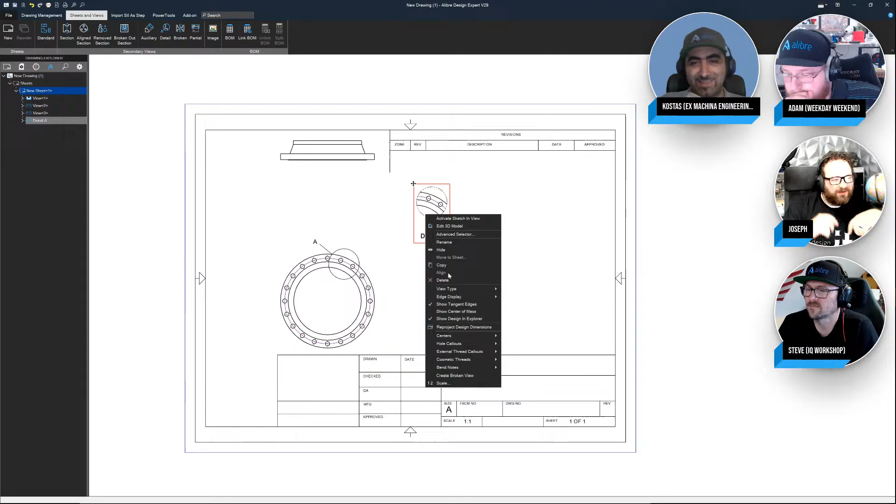Right. So on this one, let's just say that you want them to be. Our align is grayed out, and I think it's probably because these are views that get scaled and all sorts of things, so it's hard to take just a part of a thing and align it in a very intended way. Obviously, the question was, is there an automatic way to do it? But you can always sketch on the sheet and use little line helpers to line things up.

But I think that's not something for now, at least. Make a feature request. But then again, what are you aligning with? Because the detail is in that flange that you have there, Joseph. The center axis of that flange is not even in the detail view, right? It's outside the detail view, so it's a bit tricky.

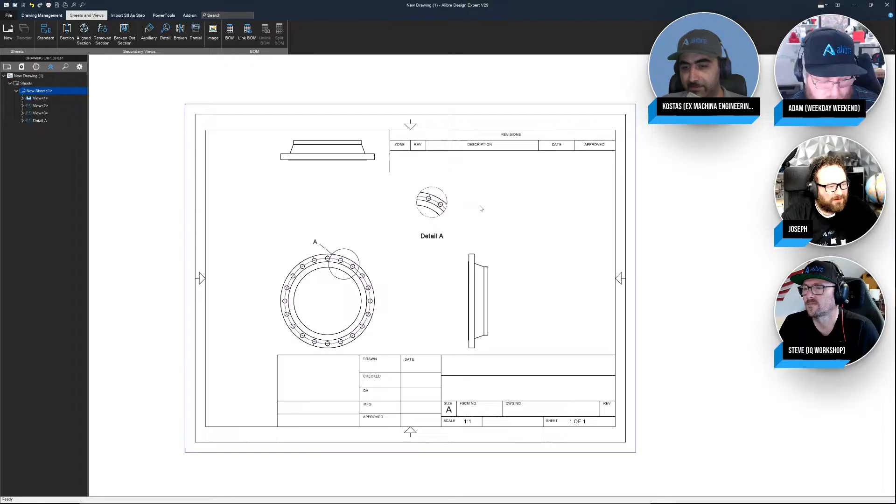Mr. Board Boy says, I usually draw grid lines on the sheet and drag and drop. Grid lines on the sheet are actually in the ISO standard. There need to be very small gray dotted lines that divide the sheet up in sections with letters and numbers for the two different directions. Sounds like you need some rulers or guides that you can drag into the drawing and snap to, or something like that.

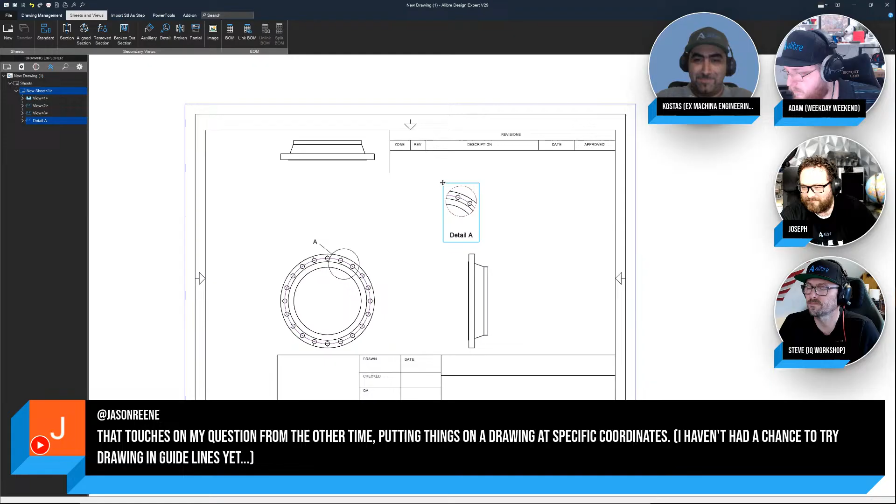It helps a lot, especially in a very large assembly drawing. Let's say that you've got an A1 piece of paper with an assembly and you're discussing with a client over the phone. You can tell him, look at the drawing at section, let's say, F8, and he knows where to look on that piece of paper, which is not trivial when that piece of paper is really huge.

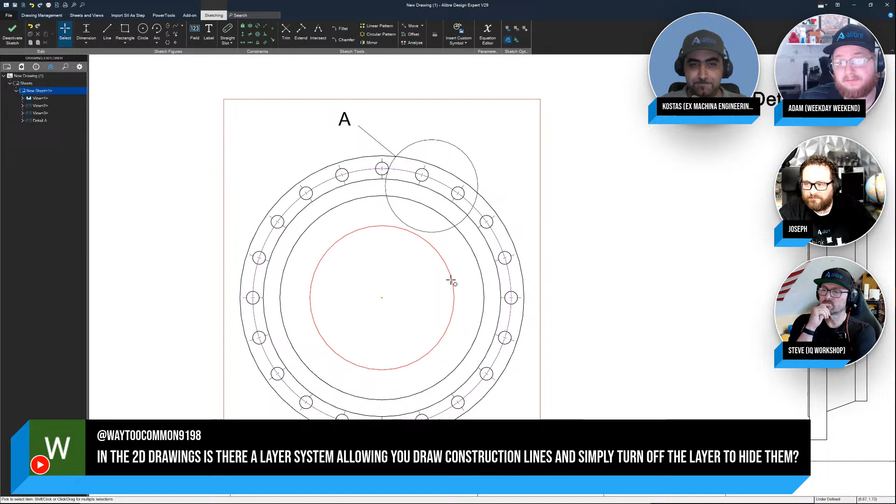Yep, this is a good update here. Align with center of detail circle or other shape. So it would be kind of the bounding box of the view. That's a great feature request, and make sure to also mention that you want to align it by the bounding box of the detail view as it is created. A good practice when doing any kind of feature request is to mention why you want that feature and what you're looking to do with it. That really helps the dev team when they're considering which features to add.

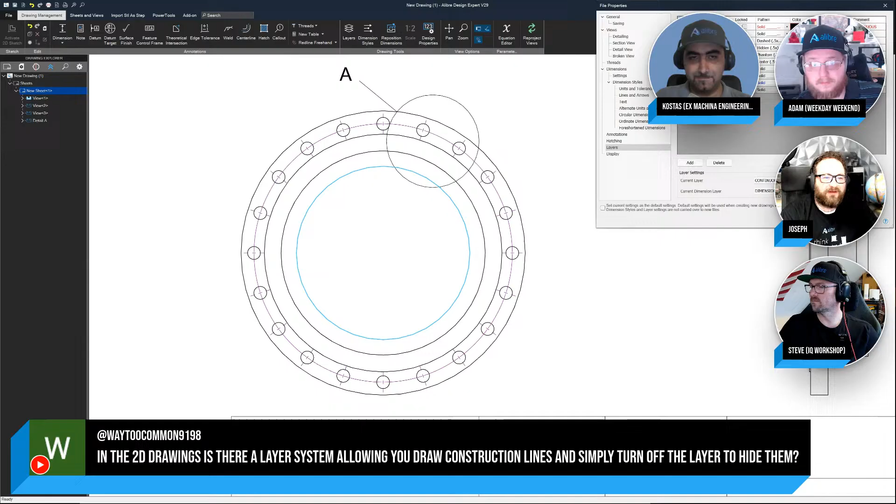And this is a great question here. In the 2D drawings, is there a layer system allowing you to draw construction lines and simply turn off the layer to hide them? And yes, that is so important when you want invisible aligning sketch elements. So here I've made a circle, and I have layers right here up top. With the circle highlighted, I can create a new layer, maybe called Invisible. I love having an invisible layer.

Drag your window to the center of the screen. Of course, I totally abuse the right side of my screen. So you can click on Add. Thank you, Adam, and add a new layer.

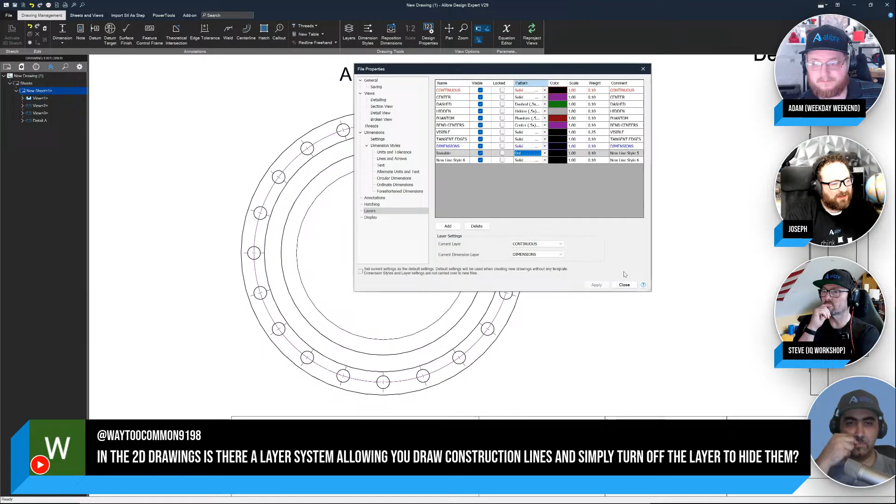I've created this layer called Invisible, and apply that. When I say Set Layer, we choose Invisible right there. Then when I go to my layers, I can just turn the visibility off, and it is gone. I can turn the visibility back on, and it's there. And if I want it to have a certain dot style, we have ISO and all these different dot styles, and make it dotted if we want. So a lot of cool things you can do with layers and colors.

And it looks like we've got a response. Excellent, thank you, sir. Excellent question yourself. When I first started using Alibre seriously for jobs, I was amazed at the depth, especially of the drawing environment. And then you have to remind yourself that this is one of the oldest CAD systems out there.

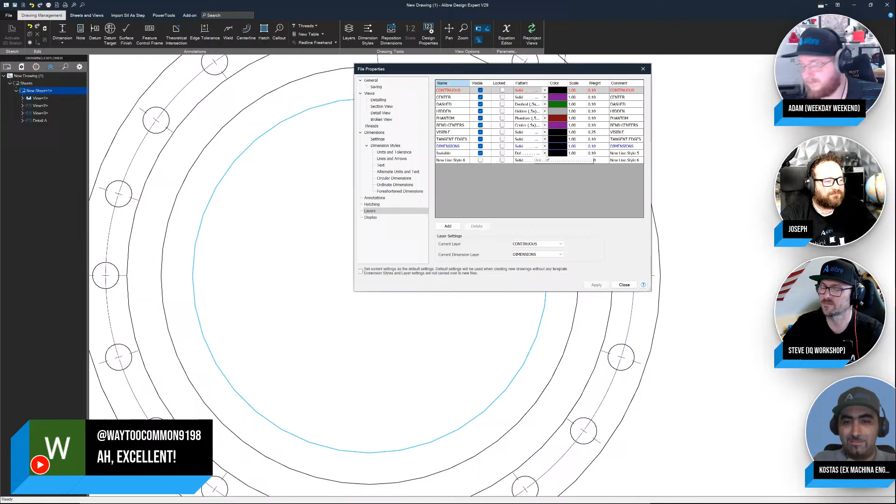So yeah, it's a CAD system that's been in the industry for a while, and it has all those features. So yeah. And it's not the new kid on the block. It's one of the oldest kids on the block, right? Yeah, the first ever cloud-based CAD, believe it or not. Exactly.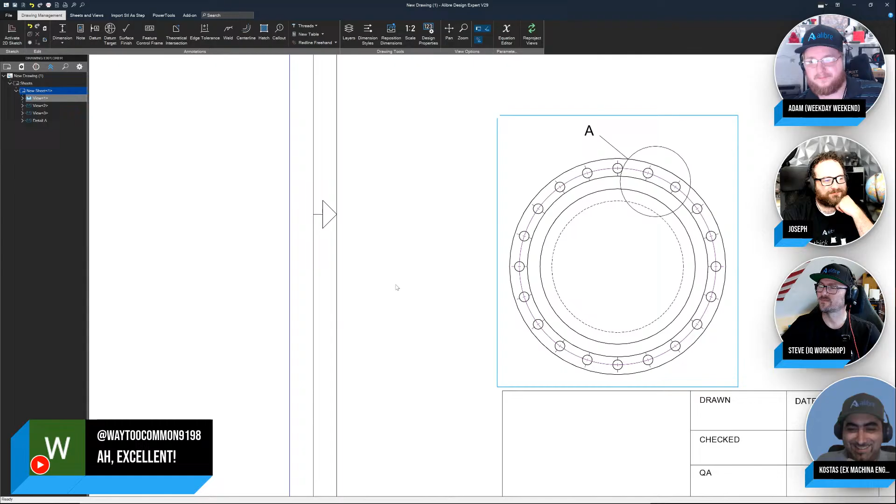Then when everybody else was running towards cloud computing, Alibre is like, you know what? Maybe that's not a good idea. Yeah. Now we're the own-your-software kind of platform. Yes, exactly. Which is, funnily enough, the innovative thing to do. Which is weird if you think about it, right? It's the whole reason most of us bought it. Well, I should say the first reason we all look at it, and then we go, wow, this is a fantastic CAD platform. I'm glad I did this.

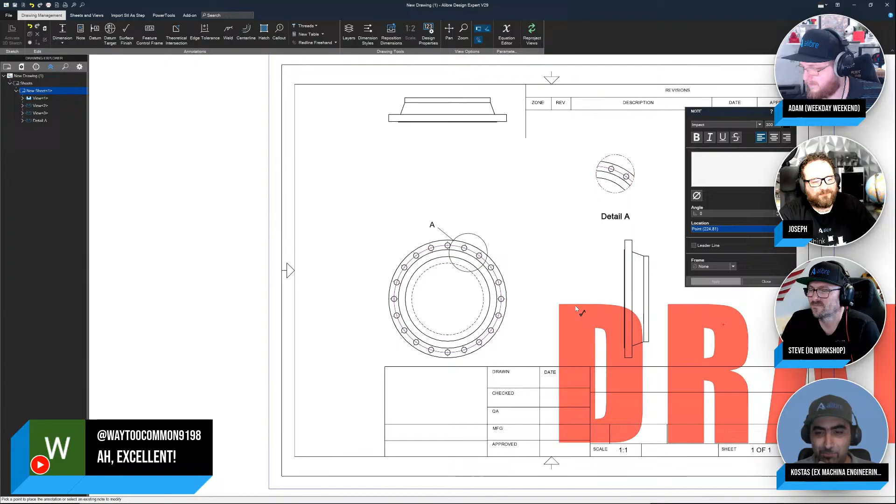Actually, I've said this story many times, but Joko did a video promoting Alibre, and I thought, well, this looks cool, and I got a 30-day trial, and it was like day 20 or 25 and I hadn't even fired Alibre up, right? And I was working on this really important, huge project with a very large multinational company, and I was using Fusion.

And Fusion was getting stuck doing the webbing in an injection molded part, and I mean stuck. It didn't like it one little bit. It was driving me up the wall. And I fire up Alibre, and I do straight lines for the webbing, thin extrude, up to next, and it did it in like seconds. And I'm like, okay, maybe I should be using this. And I went ahead and bought it shortly thereafter.

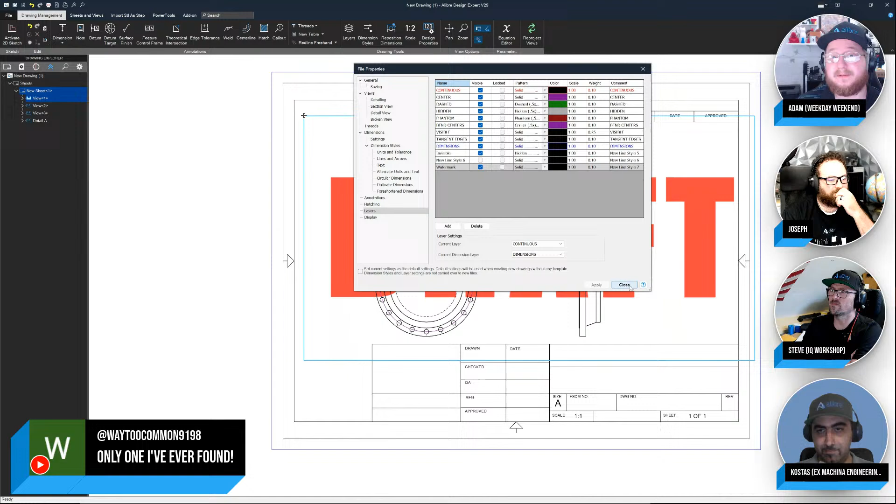Honestly, everyone has the reason that they find Alibre. And for a lot of us, it was the perpetual license. But that is not its only claim to fame. Alibre is genuinely fantastic CAD software. Like Kostas was saying, there's things that Alibre does not struggle with that everyone else does. Yeah. I got a perpetual license for a stinky sock, right? But it doesn't mean I'm going to wear it. The fact that this tool is so useful is the value add.

Exactly. And I was discussing this with a colleague I'm collaborating with on a few machine designs these days, and he also got Alibre Design Expert. My argument was that okay, it's got one or two fewer tools, but you know what? The tools it has, they all work. And guys, this is not a given in the CAD industry, right? Sorry, go ahead.

I was going to say, I still haven't seen Alibre's equivalent to the black panel of death that you see in Fusion when it starts calculating. Yeah, exactly. I think I've had maybe one crash, and even then it recovered just fine. You reopen the file and open up the recovery file. I've had it maybe 4 or 5 times, and the recovery file works, and I've lost like a minute and a half of my life. But let me tell you how many times I've had that happen in SolidWorks.

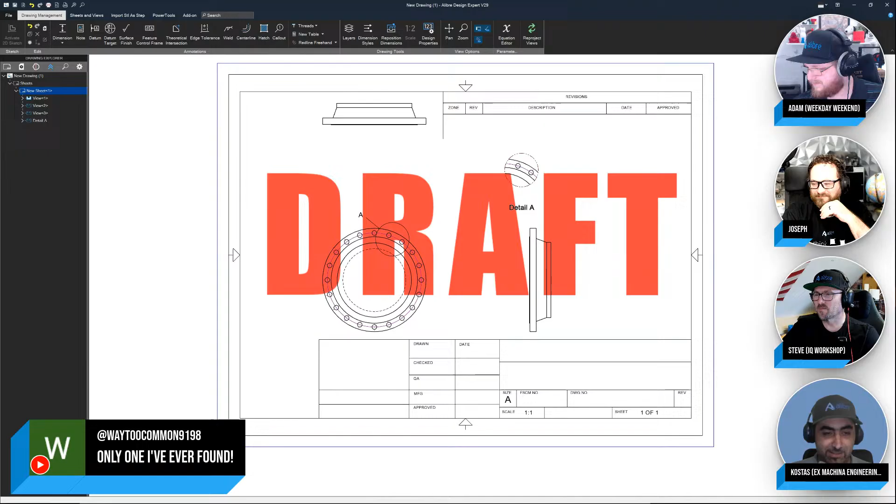So, just to balance things out a little bit. People have worked hard to make some of these software, and we're not dissing the developers, but we are professionals, right? And our livelihood depends on this software. And I am not going to use something that jeopardizes or slightly risks my livelihood. And that's about it.

My story with finding Alibre is very similar to Kostas. I was using Onshape, and I wasn't making money with it then, but I would love to at some point. And then I saw some videos on Onshape canceling accounts because YouTube videos were being made. Like, man, I don't want this to happen to me. So I literally Googled offline CAD software, one-time payment, perpetual license. Found Alibre, got the trial, started using it, and a couple days in, got a phone call.

Obviously I didn't answer because I never answer my phone. I'll call you back if you leave a voicemail. And it was just, hey, this is Alibre, just making sure everything's going all right. If you have any questions, let us know. Just an honest call. And I feel bad because I didn't even call him back. I'm like, yep, okay, I'm sold. Add to cart. That's it. And again, I found Alibre through Joko.

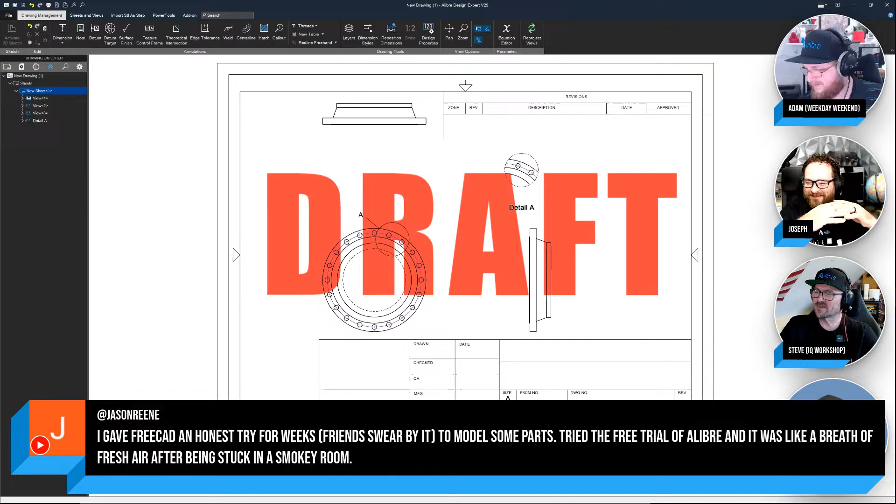One of these days, I am going to make that video, which I'm going to get so much hate commenting on. That is the main reason it's putting me off. But it'll get views. I'm thinking about making a video of, is FreeCAD really free if you're a professional? Because it is costing you money. It's definitely costing you money. And time. Right? 1.1 has come a long way. If you're designing a single part, it's maybe okay. I still don't like it, but it's multiple times better than what it used to be.

But we were discussing tolerance stack analysis earlier and making drawings, and we're showing true spreadsheet integration where you can have VLOOKUPs and logic functions. And guys, this is what we need to perform in a professional environment. This is what the work is these days, right? FreeCAD is great if you're modeling as a hobby, because the purpose of a hobby is to burn some time, right? Kill some time, and FreeCAD definitely does that. So yeah, sorry for that.

Yeah, well, FreeCAD has the interoperability too. Joseph has been working on something amazing. I'm gonna leave it at that. Yeah, I mean, what I appreciate about FreeCAD is you have a bunch of people who have put time and effort into a platform and give it to the world with freedom in mind, right? It's free as in freedom, not free as in beer, but it is no cost.

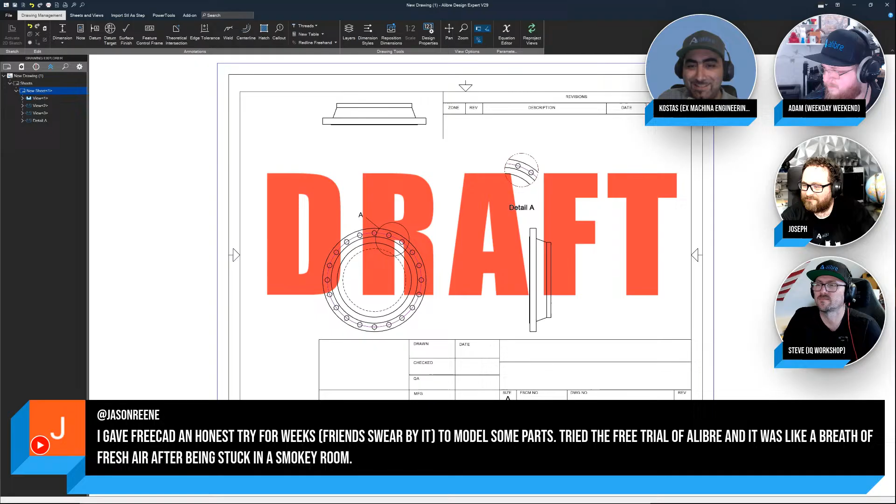And you want to hear the funny thing? Its BIM workbench is awesome. So it's better at designing buildings than designing mechanical parts. Yeah, this comment is interesting because FreeCAD really does do it all, and it's got such a big scope that it could be a big problem.

And part of that is you get people who are really good at CNC that add their CNC stuff, and then you get other people that are architects and add that stuff. And being community driven, I think it reflects a community that does a little bit of it all, and so it gets a very wide scope. And it's not even... I'm sorry. I'm so sorry, Joseph.

It's not that, right? It's that the FreeCAD community is all about building your little sand castle on the beach and defending it to death, right? No. This is the macro I built. This is the workbench I built. I built it, and you are not going to tell me how it's supposed to work, right? And that has plagued FreeCAD since its inception.

Last few years, after Real Thunder's fork, which everybody stopped using official FreeCAD and went into Real Thunder's version, which I did as well, right? After that, they started getting their act together a little bit and realizing that we need to be listening to the users. Git good is not an answer to everything, right? But there's still a lot of that mentality.

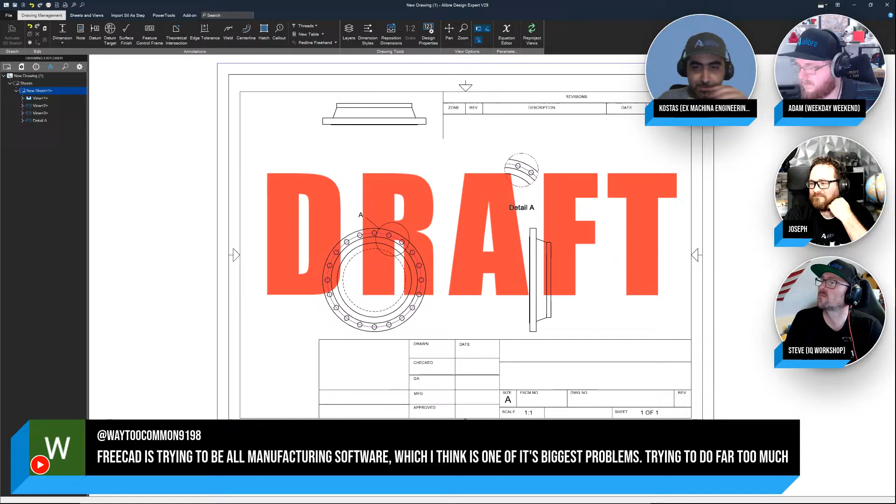And if they're not prepared to tell their contributors that this is a perfect piece of code, but it's not user friendly, so we're not going to use it, if they're not prepared to do that, they're not going anywhere, sadly. And I don't see that direction from them. And one of the beauties is, since it is free, you can fork it and fix all the problems yourself if you really wanted to.

That is true. And Real Thunder did that. And for a little while, on my transition, I needed to design a part, and I had already started my subscription for Fusion. It was a pretty simple part, single part as well. And I did that in FreeCAD, in Real Thunder's version, and it worked. And it was nice to see those fixes that were looped back into the main release of FreeCAD too. Exactly. I think that's when FreeCAD started picking up momentum.

But I think this might actually sum it up. If you go to the stats for nerds page on weekday weekend, the most used CAD software by far is FreeCAD with 211 entries. However, it does not place at all on CAD software with fastest times. However, it's also not the CAD software with slowest times. So it is definitely capable.

And 211 entries. Slowest times, is it Siemens for the slowest times? It is Fusion 360 right now. Fusion 360. Siemens NX is actually number 2 with the fastest times. But what about Solid Edge? NX is pretty up there. By the way, NX is hugely expensive, right? I mean, do not consider NX if you're not like a 100 employee company, $1 million yearly cycle or whatnot.

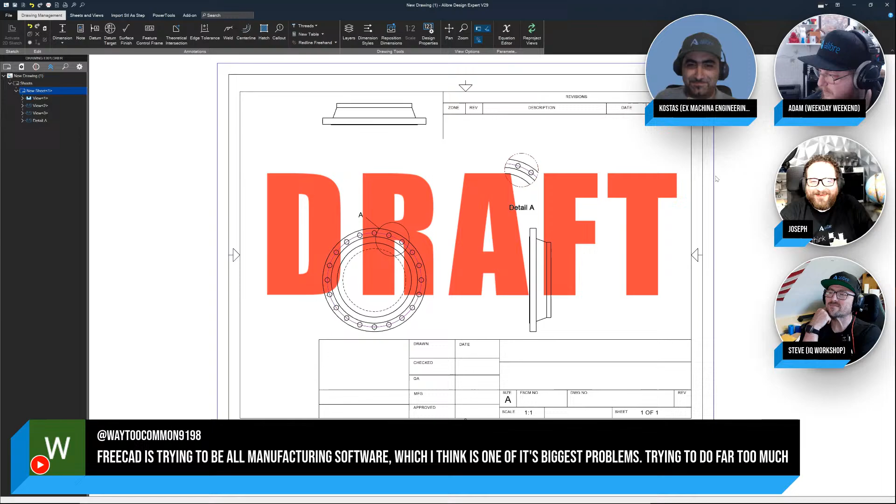Oh, man. Yeah, check this out. My wife just brought me a hot dog from Costco. Oh, that sounds good. This is an interesting one. It is currently 9:54 p.m. over here. So what you're doing, Joseph, is... Oh, man. I'm making you hungry. What Joseph is doing is committing taco sacrilege. Yeah, we're gonna have a new add-on called the hot dog add-on now. Yep. The arch enemy of the taco, the hot dog. When you go to the big restaurant in the sky, you're going to be going to taco hell for that. The big restaurant in the sky. Do you have that trademarked? Oh, I'll open source it. I'll open source it.

I love it. I love that. I like this comment here. It's a kind of heaven, isn't it? It's a kind of heaven.

It sure is. But I find fillets are the most finicky bit of Alibre and often take more than creating the part itself for me when I'm getting overcomplicated. So this is a great comment, because when you think about what CAD is doing under the surface, fillets are so simple to human eyes. Take a rough thing, smooth it out with a constant radius, done.

But when you think about what's happening in the background, you have topology naming, you have dependency graphs, you have sketch solving and constraints, you have external references, you have structures and trees of dependencies. And fillets stress every single one of those things simultaneously. And it's going to run all the fallback logic of a kernel, more or less, because they are so encompassing as to everything that is getting solved. And it's going to be like that for every platform as well.